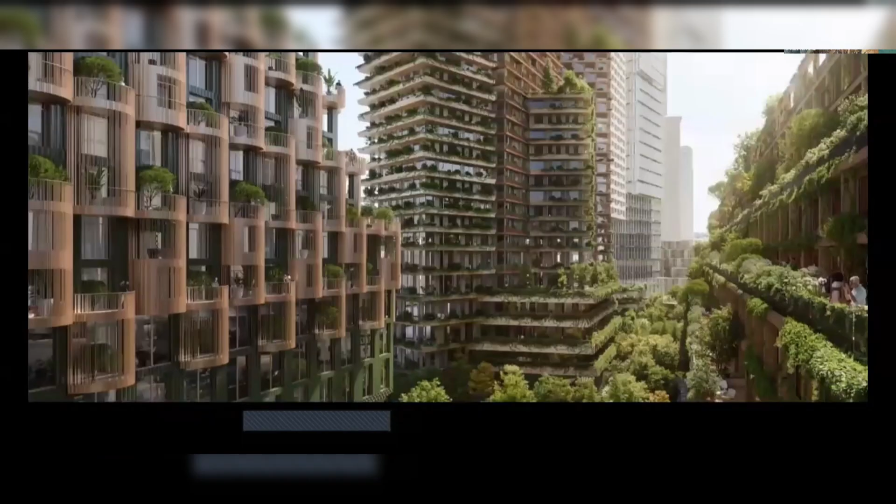We must acknowledge this opportunity and see this opportunity that is being provided to us as urban planners, as designers and architects. We must understand as engineers and planners that we all can shape our local environment. We all have the opportunity to shape our future.

Today, we have 7 speakers who will all tell their stories. We have environmental scientist Maitri Fischer. We have landscaper and regenerative designer Anton. We have Dr. Yeang, who has written over 13 books and been working on green building for almost 50 years.

Thereafter, we will hear from Papa Tiyok, Prasetyoadi, one of the core founders of the Green Building Council Indonesia and director of PDW, famous for building Jakarta's football stadium, and a real Indonesian placemaker, a spokesperson for inclusive design and public spaces.

Joining him will be Dr. Nirarta Samadhi, one of the Indonesian founding members of Cities for Forests and country director of the World Resources Institute Indonesia. Dr. Nirarta Samadhi will be speaking about his new policy design that's enabling Indonesian mayors to build more green parks and public spaces.

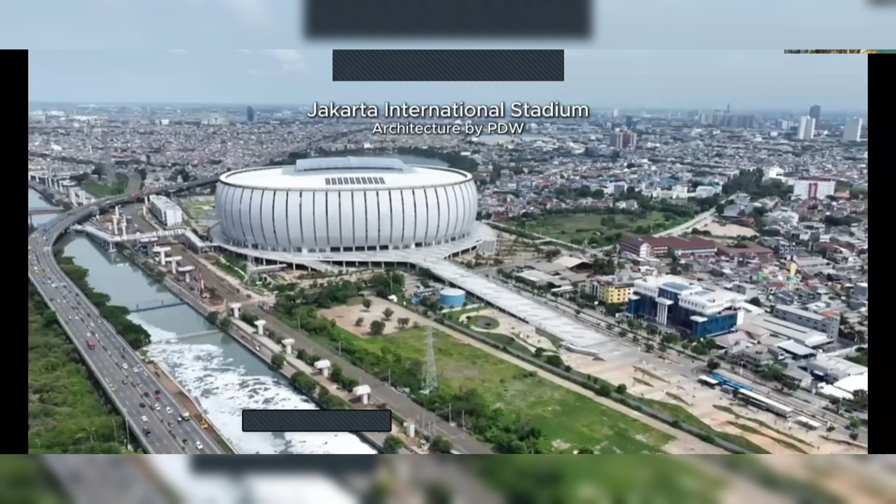And last but not least, we will hear from the Sustainable Building Award winner, the Supreme Award for Structural Engineering Excellence, the visiting professor to Yale and MIT, the unconventional and free-spirited natural building master, who we also like to call Mr. Rock and Roll, Professor Neil Thomas, giving us an outlook into the future and hopefully ending on a positive note. I'll hand over to Maitri Fischer to start this session.

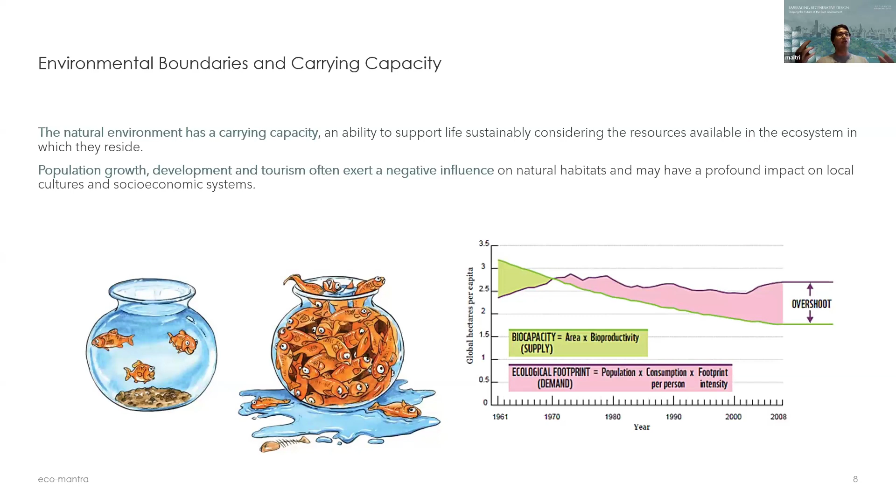So we have the concept of this Earth Overshoot Day, or this concept of biocapacity, where the Earth provides resources and ecosystem services which we need to survive, but ultimately we are consuming more than what the Earth can provide. In 2020, we got to the point where we would have needed 1.6 Earths to maintain our need for resources and consumerism. The fact that we're taking more than can be provided means we're depleting something at a rate quicker than the environment can replenish or neutralize and clean, meaning we're starting to have a net negative impact on the ecosystem, on the planet, on the place that we live.

There are more complex ways of looking at it, such as the 9 planetary boundaries developed by the Stockholm Resilience Center, of which out of the 9 important planetary boundaries, by 2023, 6 of those had been crossed.

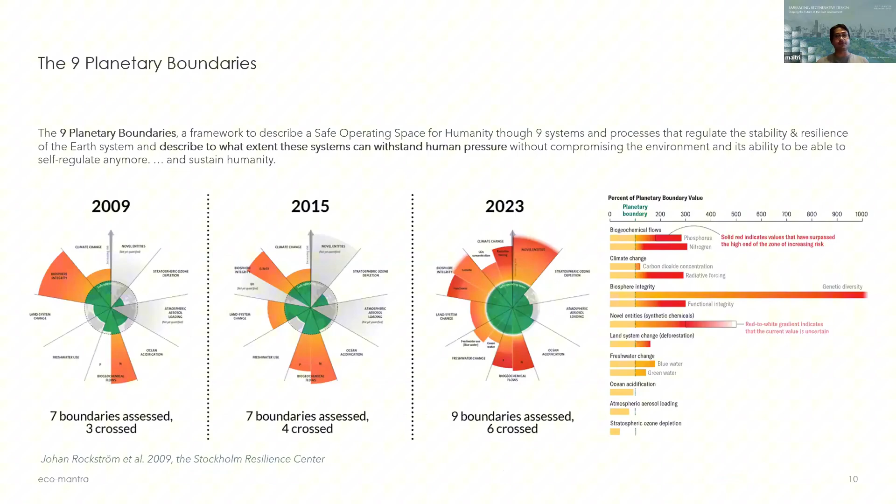Bali, the place I grew up on, is an island. It has clear ecosystem boundaries, smaller than planet Earth. Basically, what's on the island supports the people on the island. Obviously, we have global trade and whatnot, but we're not globally trading in water and ecosystem services, though we can bring in more food, for example.

Ultimately, mass tourism has pushed the island beyond a lot of our environmental carrying capacity. We see many indicators of this. We have massive land system change. We have huge normalizations of rivers, rice field conversion, forest conversions, a lot of built up areas creating impermeable zones. This creates floods. We have floods like never before.

We have a massive loss of biodiversity. We don't have living rice fields anymore. These are sterile places. They're sprayed with pesticides and fungicides and everything that you can imagine to maximize the productivity of the rice, but it leaves us with a very barren land.

We see pollution everywhere. Only 48% of our waste goes to landfill. 52% of our waste in Bali makes it into the environment - burnt, rivers, ravines, oceans, dumped, whatever. We are seeing urban heat island, obviously a global problem. We are facing a water crisis. We have to continuously drill deeper, facing massive pollution of surface and groundwater and a lot of saltwater intrusion.

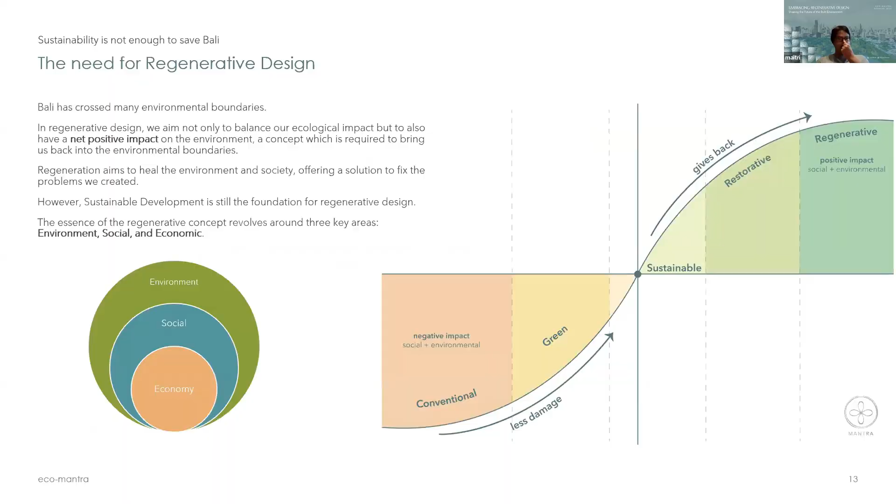So sustainability can only be achieved if we understand the state of the environment. And where you are really determines what you're dealing with. In some places, you have bountiful supply of water. In some places, you have no fresh water. In some places, you have access to waste management infrastructure. In some places, you have none. In some places, it's too hot and humid, and in some places, it's very cold. So ultimately, design has to be done through an understanding of our environmental condition.

So I've drawn up some examples quickly. I only have 10 minutes for this presentation, so I just wanted to do a little bit.

Most of our work is in Southeast Asia, and our tropics are marked by high humidity, intense solar radiation, monsoon rainfall, and dense biodiversity in most places. More importantly, we have unique microclimate fingerprints in all of our sites.

The most important thing in the tropics is how comfortable do we feel? People are always complaining, oh, it's so hot and humid. At our standard average daytime temperature, most people are uncomfortable - it's too hot, too humid, and there isn't enough airflow. So a lot of our work is focused on creating spaces where we can live outdoors without air conditioning. How do we create spaces that are comfortable without air conditioning?

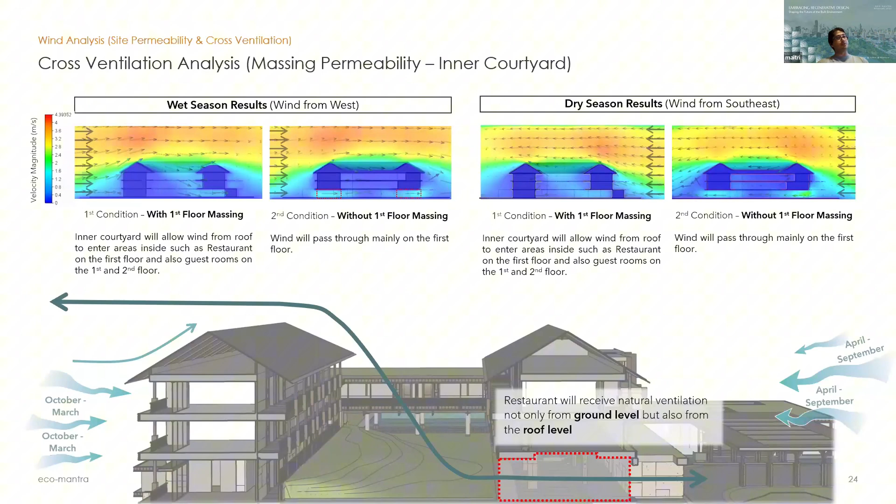So it's really important to create a building that allows wind from all over to penetrate the courtyard and distribute itself to all its occupants. Here we have an example where we optimized airflow and cross ventilation with computational fluid dynamics models to improve the amount of air that would go into the inner courtyard of the building, along with our easterlies and westerlies. The building is appropriately penetrated from east to west.

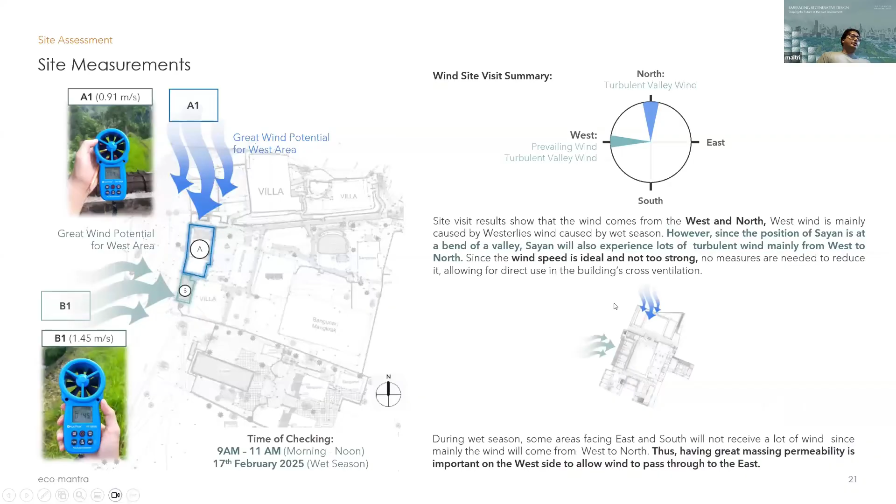This is actually the example from the design of my house. It's really... I'm running out of time, huh?

Yeah, I think the understanding of the prevailing winds and also the microclimate that each site has is enormous. It has so much potential if we properly take the time to understand our sites, walk our sites, study our sites, and potentially put up some measurements and devices to measure and document the prevailing environment on our site. I feel like this is something that a lot of developers and planners are missing out on, and architects are maybe also not properly trained in understanding the environment in the way other people can. We always think that these kinds of design and developments should be more integrative, with many more people involved, especially in the very beginning phases of the planning.

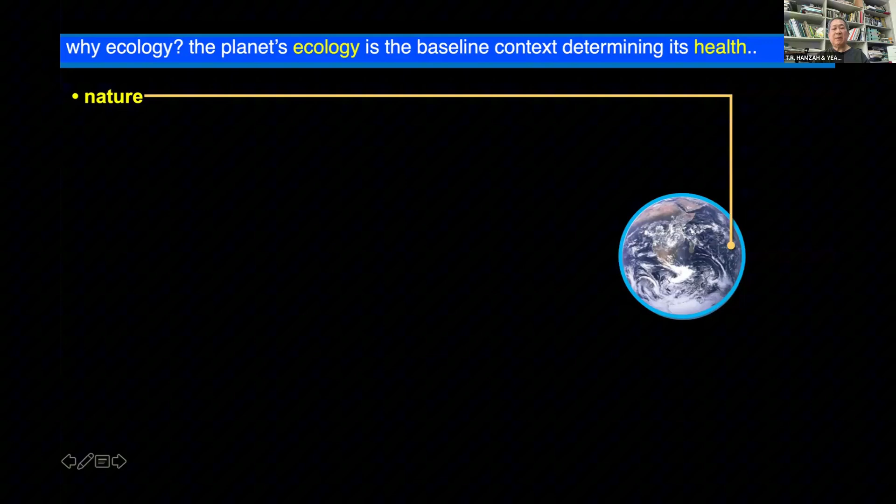Most architects are not eco-literate, so I'm going to go through this very quickly to explain the basis for our work. We see the planet as covered by this thin film called the biosphere. Within the biosphere, there are units in nature referred to as ecosystems. Ecosystems exist in the biome within the biosphere, and within ecosystems are communities of plants and animals that live in habitats, and their populations of different species and organisms.

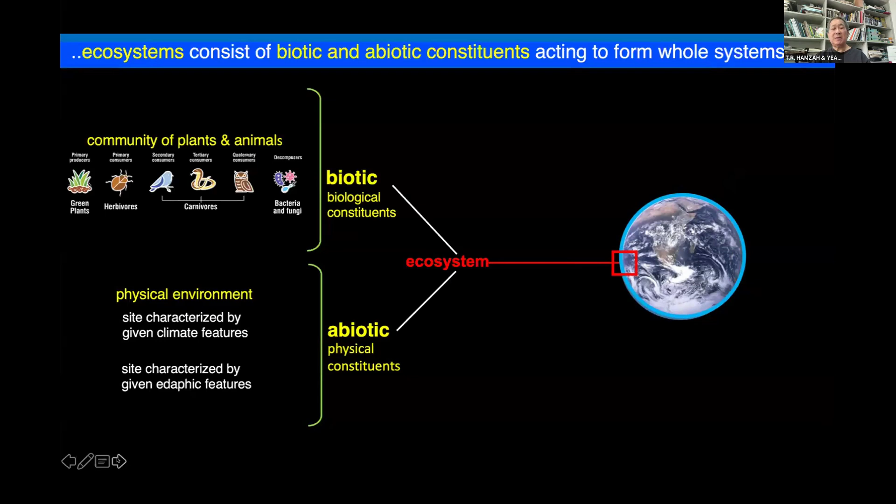The ecosystem consists of both biotic and abiotic constituents acting together to form a whole. Biotic are the biological constituents, abiotic are the physical constituents. It looks simplistic, but actually within ecosystems there are very complex processes that take place between the plant and animal communities, the geology, the soils, and so forth.

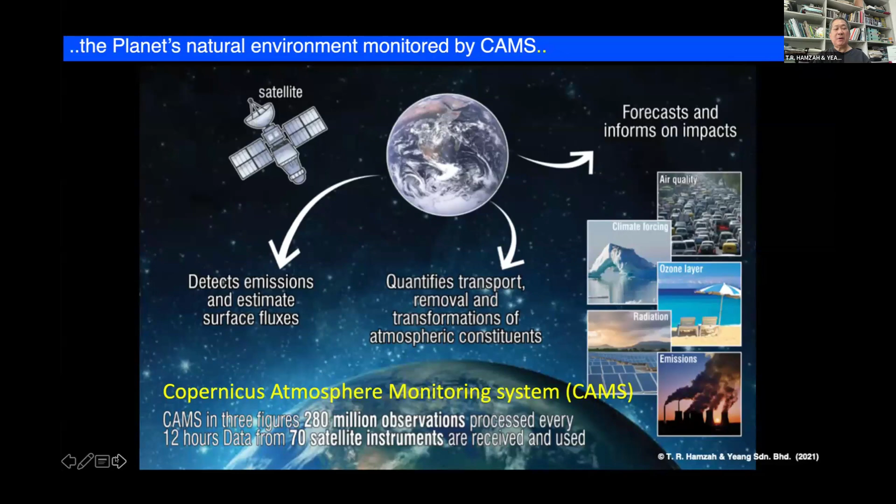But this is just another quick summary. What we need is a universal monitoring system so that we know exactly what society is doing to the ecosystem, so we can take appropriate rectifying action. Now, within the planet, there's human society.

Human society is part of nature, but it's the most powerful of all species. So I see this as a separate item in our approach, that we are so powerful. We can change the landscape, we can deforest it, we can change the waterways, we can pollute the air.

Then we make things. We make more things than any other species in nature. We make built systems, we make artifacts, we make toys, we make telephones, and it's estimated that 60% of the environmental crisis is caused by buildings. So we are the authors of this suffering, and we should be the authors of its recovery, and not the victims.

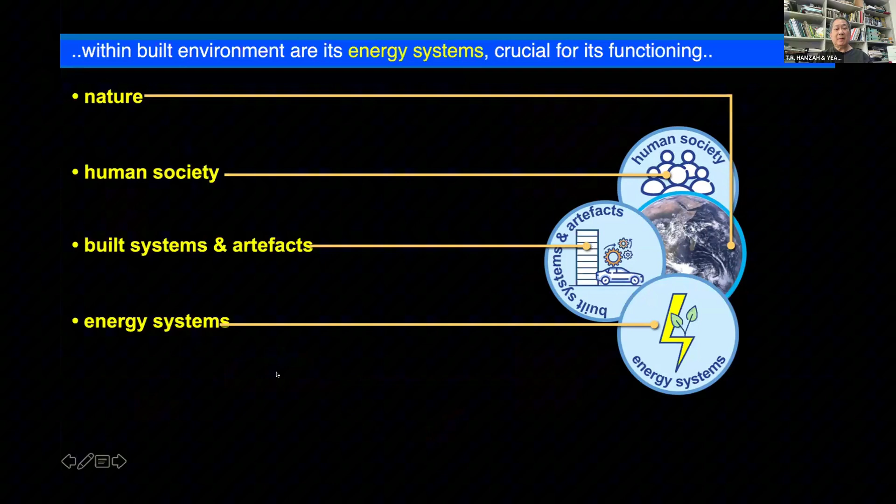Then there's the hydrological systems, and water is what life is all about. When astronomers look into the sky, the first thing to look at on different planets is whether there's evidence of water. If there's evidence of water, that's evidence that there's potential for organic life.

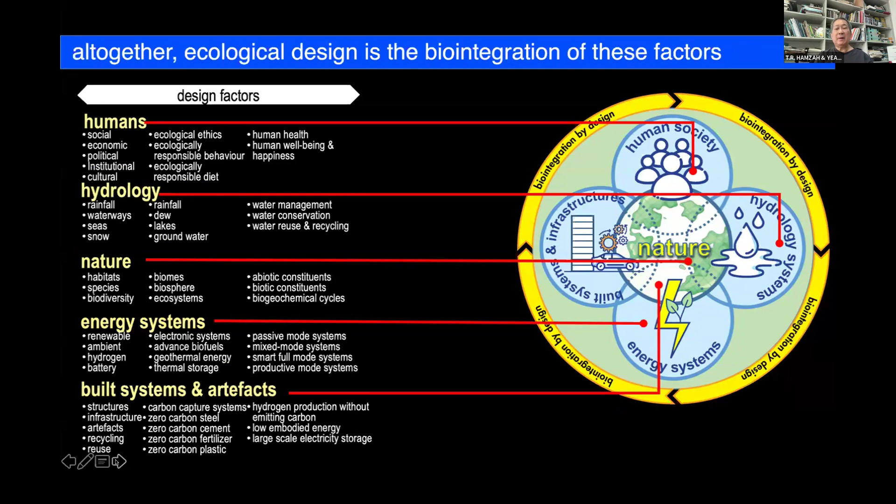In summary, this is the model of our design, to see how we can biointegrate these five factors together: nature, human society, built systems, infrastructure, energy systems, and hydrology, into an organic whole. That is the challenge of ecological design, and that is, if you like, what I'm trying to do for a good part of my life.

So we look at the first thing, which is nature-based solutions by biomimicry. Now, the approach of biomimicry is to select a biological system. In my case, it is the ecosystem. And the next step is to try and identify its attributes, to try and create design systems as human-made ecosystems.

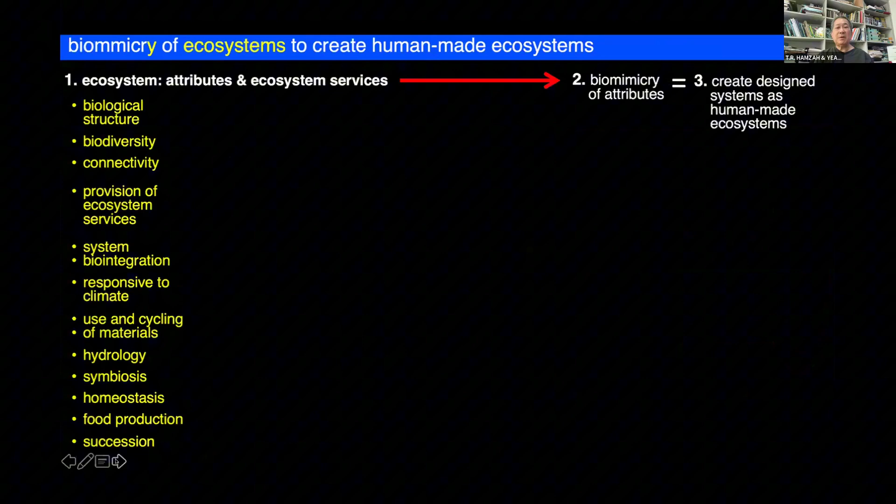So these are some of the attributes of the ecosystem: it has a biological structure, it has biodiversity of both biotic and abiotic constituents. It's interconnected, and it provides ecosystem services, which are services that contribute to the well-being of the planet without human intervention. The systems are biointegrated, and materials within the ecosystem cycle.

I don't want to go through this whole list, it's just a list of properties that we need to emulate and replicate. So that's part of my work, which is to try and replicate, reproduce, imitate it, and augment it. We can cooperate with nature and intensify it. So these are different strategies that are used for ecological design.

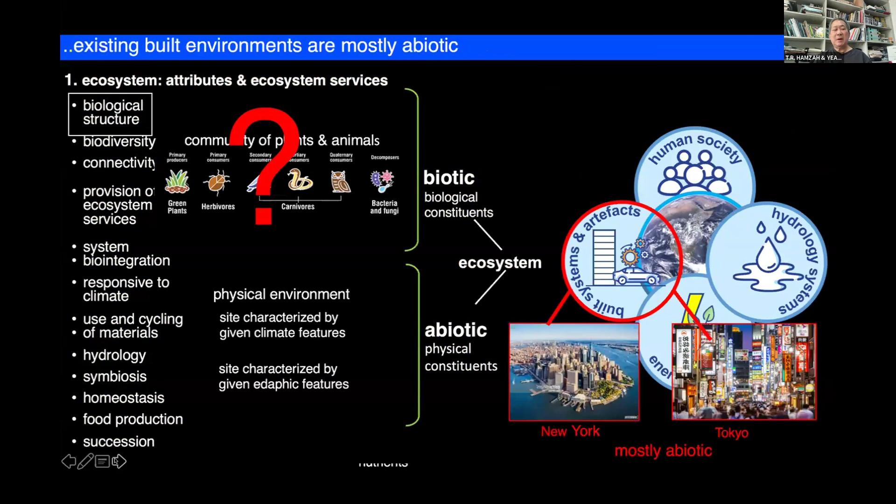So now back to the biological structure. The ecosystem consists of both biotic and abiotic elements. But let's look at our existing built environment—it is mostly abiotic, mostly inorganic. So if we were to imitate the biological structure of ecosystems, we have to compensate for its lack of biotic constituents, and bring it together and balance it to make an organic whole.

Or the idea would be interconnected vegetation.

Being interconnected enables a greater sharing of internal resources and engenders a much more stable and biodiverse ecosystem. And so, of course, the ultimate is to cover the entire built environment with green, with vegetation, biotic constituents. That is the golden chalice of what I'm trying to do in our work.

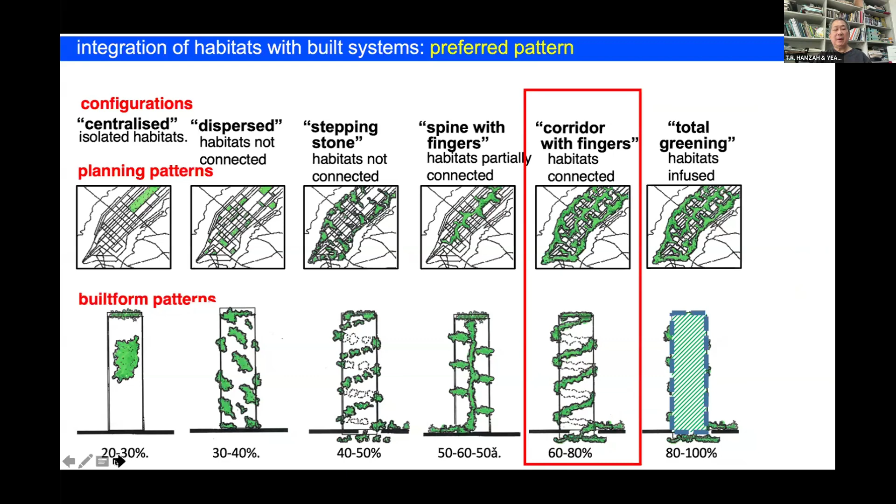Now, these two are the preferred patterns, and we try to achieve 60 to 100% biotic constituents, so that within the built form we can have green roofs, vertical greening, green sky courts, green atriums, green areas on the ground, and green links to the hinterland and the underground. With this as a start, we try to link all our buildings, not just horizontally, our built environment, the greening, but also vertically as well.

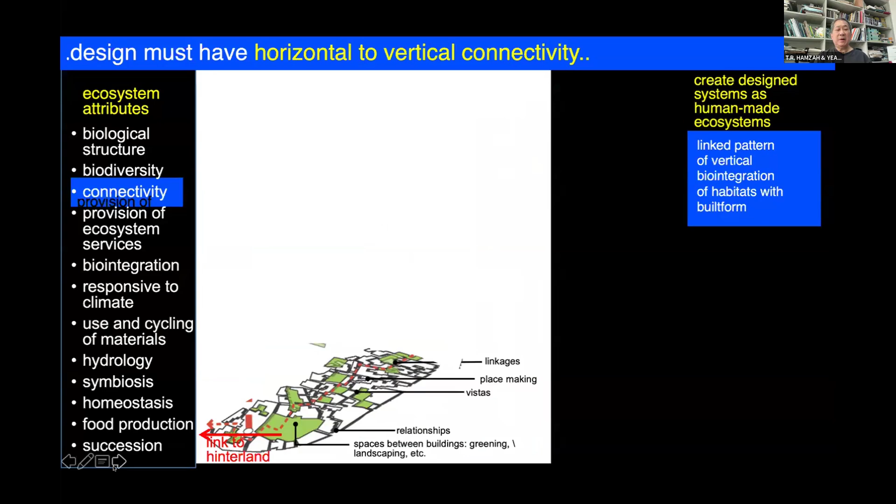This is an indication of what we try to do in our design when we create habitats. This is a competition scheme that we did in Singapore. We didn't win it, we got second prize, but the idea was to explore the possibility of a spiraling relationship.

The population density is quite high, far higher than what we have in Bali. And that's a good view. We should be most concerned about larger cities than smaller cities, because that's the generic problem we have to address.

I can't change the slide. It's okay, I think we are coming. I'm going to have to start to cut you short, Dr. Ken, because we're already at Anton's slot, and I couldn't get the presentation, the first bit, working. So would you mind if I have a bit more? Wait a minute, okay. I'm stuck, I'm stuck now.

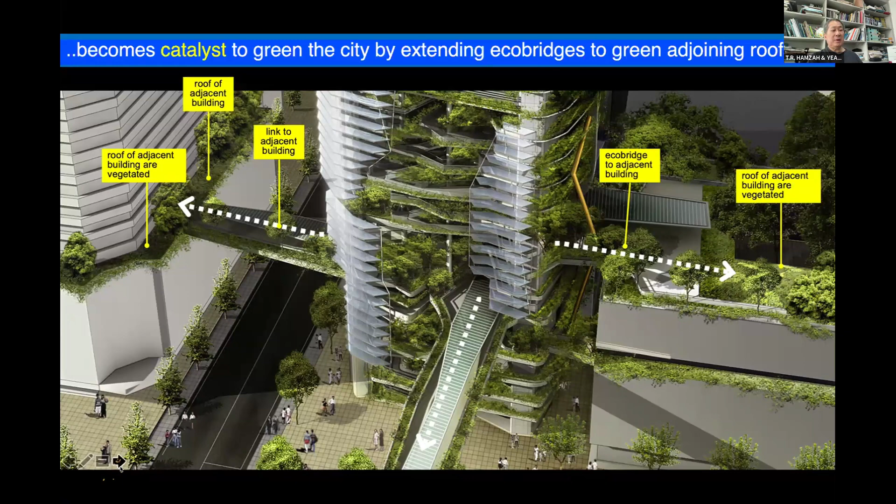The proposition of this project is that when the landscape ramp reaches the floor level of the adjoining roof, we bridge across and we green the roof. So this is a way of greening the city.

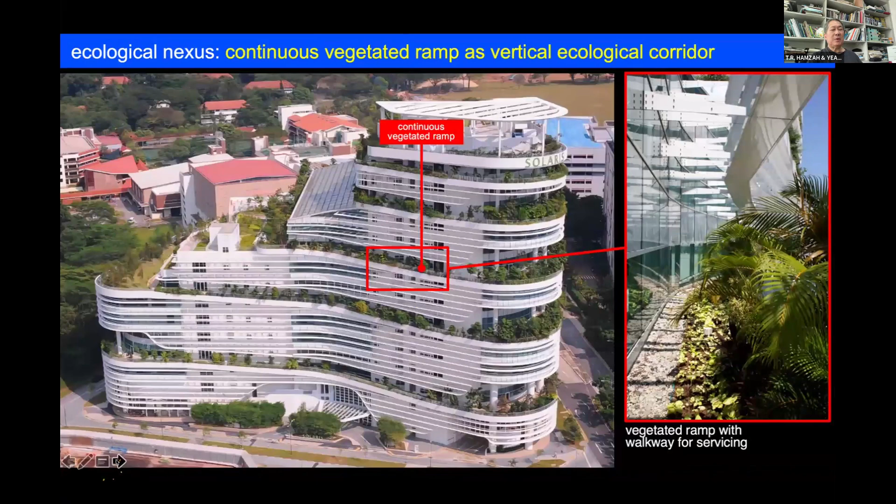Here's an example of a building where we had continuous vegetation going from one end of the site to the other side. In the Solaris building, we had a vegetated ramp, but this time for the ramp we also had a walkway, so you can service the vegetation. And we had sky courts, which are green.

Hang on a minute, okay, I'll end now.

I think the context is wonderful, and what's also very obvious is that you've authored many books and have a set of principles and also a methodology in place that you've developed, which a lot of students use, and which is, I guess, also part of a student's learning.

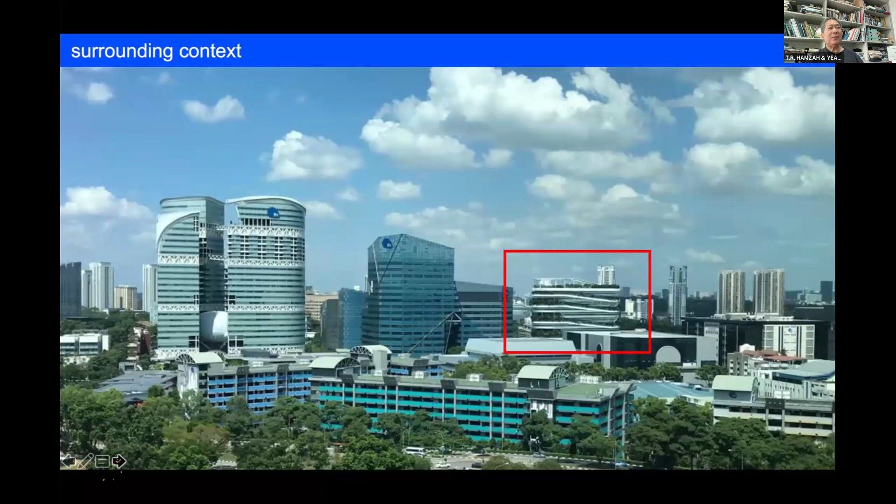Perhaps we can have a brief discussion with Anton if he's ready. Anton, do you want to jump in here on this note? Yeah, hi, hey, I didn't get it working just now, you know.

Okay, good afternoon everyone, and hi Dr. Ken. I think we met in Jakarta previously for a talk in Jakarta Architecture Festival, and projects from Dr. Ken have always been my inspiration in pursuing this architecture and landscape architecture career, because he's a pioneer of bioclimatic and ecologically integrated architectural design.

So my topic today is going to show examples of regenerative design from a landscape architecture perspective, and I will showcase some examples of projects in Singapore and Indonesia where we integrate ecological design and regenerative elements into these projects. As we know, most participants probably come from the Southeast Asian region, and this region shares the same problems.

We are facing deforestation. A lot of land is being demolished for new developments, and this is always happening in big cities. As a result of this deforestation, we lose a lot of biodiversity, a lot of extinction. And when we talk about extinction, it's not just fauna, it's really about the vegetation, different kinds of species, from insects even, it's very important for nature.

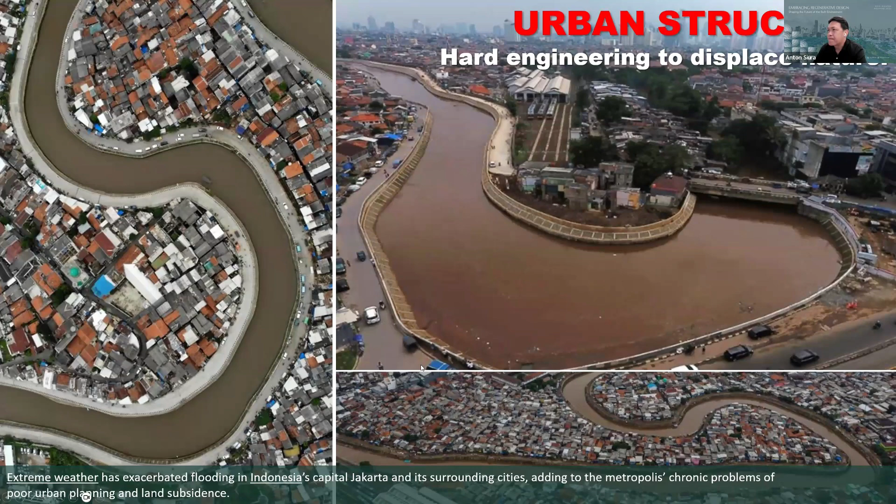And this keeps happening. When this keeps happening, we don't have space to absorb water, we don't have space for the trees, and the water is everywhere during the high rainfall periods. Flooding becomes a major issue in the big cities, right?

And I believe we all contribute to this because most people are moving to the city to make a living, and the city becomes an undesirable place to live because it's getting hot or it's getting too wet. This is also happening in Singapore, when we recorded 37 degrees in Ang Mo Kio. This is the highest temperature, and I think recently this record keeps getting broken.

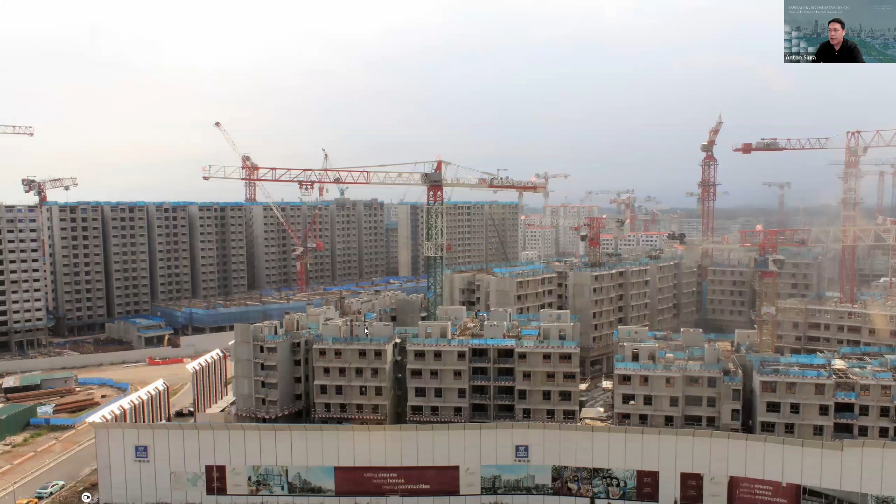So we are heading into unsustainable futures if we keep doing the same thing. This is a reflection for us in our role as architects, landscape architects, engineers, or planners, or if you're the stakeholders. We always face the same thing, the constant demolition and reconstruction for urban growth. So what role can we contribute, and how can we balance it? I will show two example projects, from Singapore and also in Indonesia.

Singapore has been shifting from a city in a garden into a city in nature in the last decades. The idea is really about how we can integrate design that promotes a lot of greenery, not just on the surface but on the rooftop, and also provide a lot of space for water infiltration, detention, and storage.

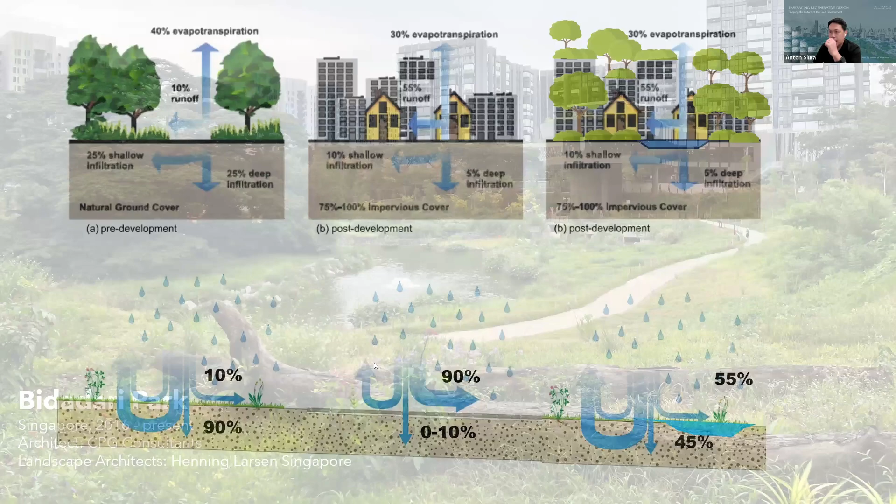This is a project I was involved in back in 2016, Bidadari Park, a massive new planning for a former cemetery area. It's about a 60-hectare site, and what's interesting is that this area is designated into new public housing. But in the master plan, there's a 10-hectare park of the existing secondary forest to be preserved, located in the center of the new development, with most of the perimeter of the site built as public housing or residential area.

I'm showing the development from 2010 to 2024. As you can see in the left area, this is a former cemetery zone, and now almost everything is fully developed into public housing.

But in this project, I want to showcase an example of a park that focuses on regenerative design. We have a central park with a retention pond. The function is, other than providing park space for the new residents, to also become the place for detention and retention, because there's a new catchment that needs to be captured into this pond.

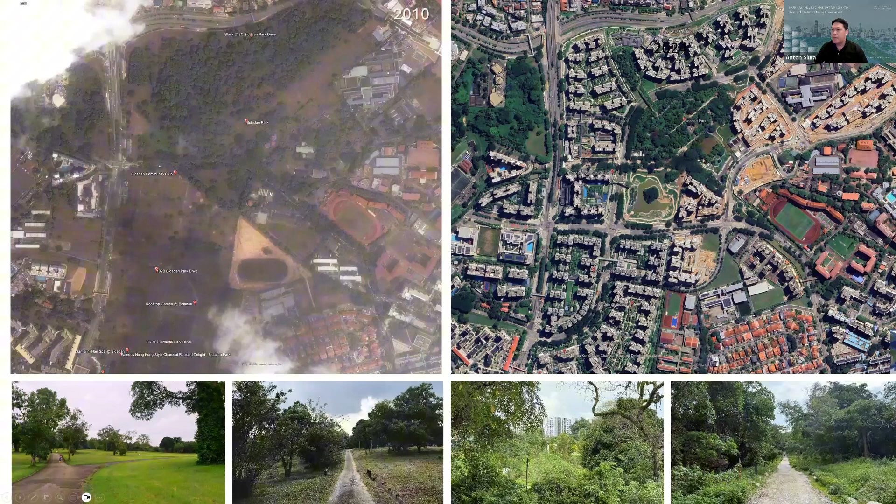Not just creating a natural pond - even the existing trees are kept within the pond as part of biodiversity attraction efforts. You can see the different quality of water when it's on concrete versus on a green area. This water is not just clean, stored, and slowing down the runoff, but it also provides life for biodiversity, and becomes a space for people to do many recreational activities.

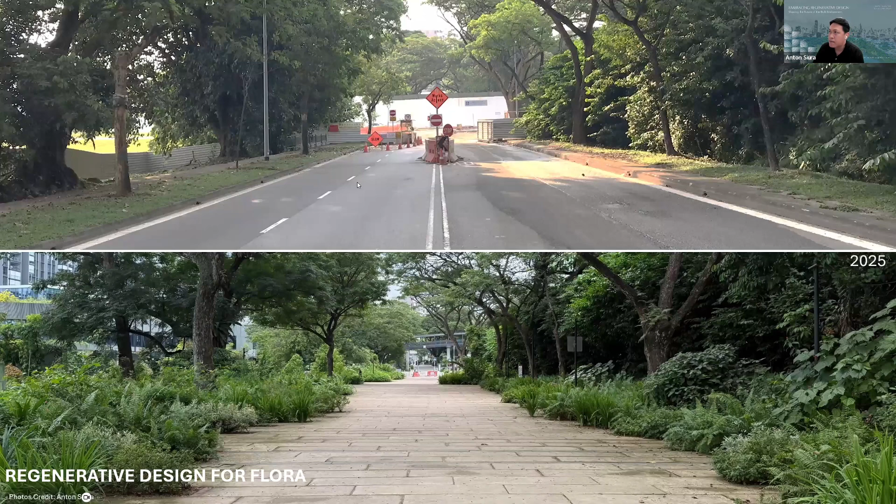The existing roads are also kept, with low intervention. They changed into a pedestrian path and introduced different kinds of flora and native plantings of Southeast Asian regions. This is the left side, the existing park. As you can see, sometimes we don't need to do massive efforts to create a nice park.

We just need to do a low intervention, introducing a lot of native plants and changing the drain into a natural drain. The result is a space not just shared by people, but also becomes a place for the birds to come. And since the birds come here, we provide water for the birds, designing a marshland that allows the birds to come have a shower and also become part of the ecosystem for the park.

Not just providing space for the birds, we also designed an eco bridge that links two different parks. This bridge is 15 meters in length, but only 2 meters is designated for pedestrians, and the rest is planted with dense vegetation, to allow smooth migration between the two existing parks.

And the design also respects the old gardens. So in the 50s, there were mounds, and we recreated those mounds, and this mound became part of the identity of the park. And when my mothers and my son come to the park, we try to create these new memories, developing from the past memory.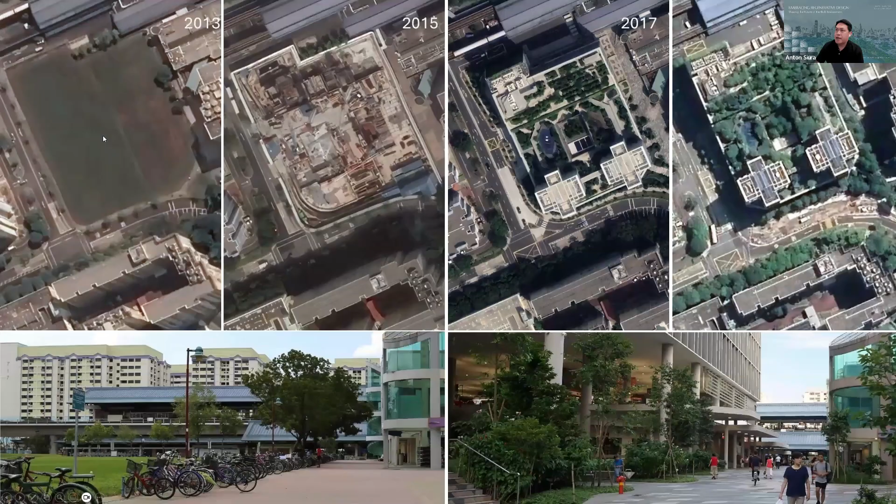So it changed from a very small plot of 9,000 square meters, from a passive lawn into a very biodiverse environment. Almost 600 trees are planted in this size, meaning 1 tree every 15 square meters. And not just planted trees—we designed a system that cleans the water, slows down the runoff, and stores it.

We reuse it for maintenance and irrigation of all the landscape. So during the rain, you can see the water trickling down, cleaned by different vegetative filter systems, and we reuse it to irrigate all these plants.

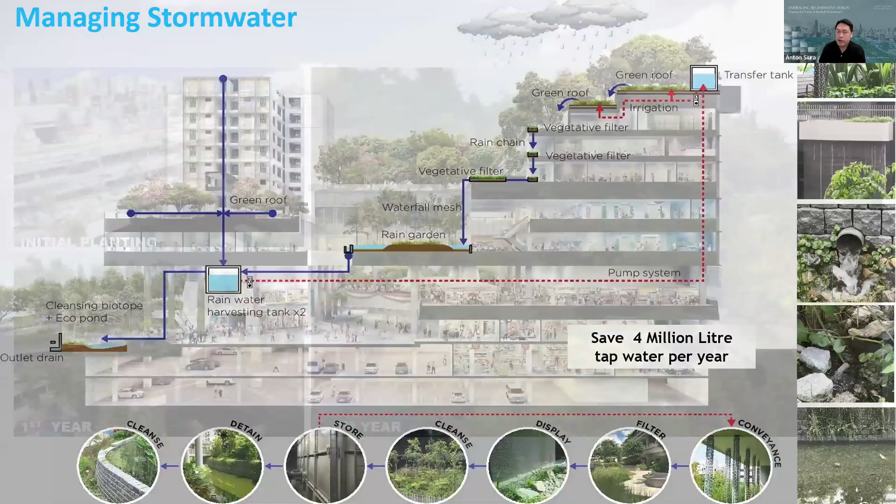Within 3 years, almost all the trees covered the surface of the building, and you can see the transformation. All these plants, all these trees, are built on concrete slabs. So we just need good soil to allow nature to thrive.

And the plants planted here are biodiversity-attracting plants, fruit trees. They create a space for many animals as well. You can see the transformation in just 10 years, how these trees grew from 4 meters to 15-meter heights and became an amazing space for people and animals using a regenerative design approach.

So now we move to Indonesia. That effort is not just finished in Singapore. I'm trying with my team to do a lot of regenerative efforts in Indonesia. For the last 6 years, we have worked on over 50 projects, and every project we always approach with the same method: regenerative, water-adaptive design. This can be applied to many different scales, from public parks, streetscapes, buildings, residential, to resorts.

An example is the Tebet Eco Park in Jakarta, which is an old park that has been there for the last 50 years, but it had a lot of problems: a garbage dumping site, inadequate hydraulic capacities, and it was split by the roads, but it had a lot of beautiful trees.

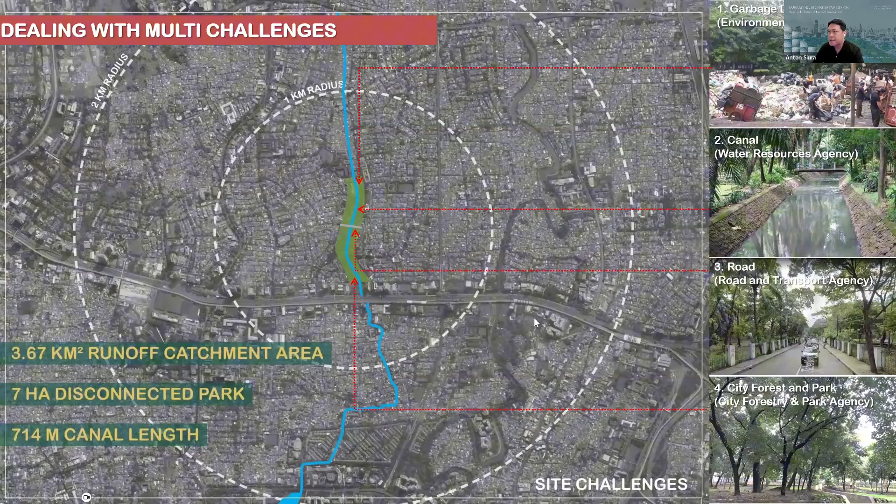And when I look at the transformation again, in 4 years, most of the existing trees are still intact. We just did a very low-impact intervention to design the park to be more resilient. So we transformed this existing problem with nature-based solutions, changing the dry land and the flooded land into a more blue-green open space.

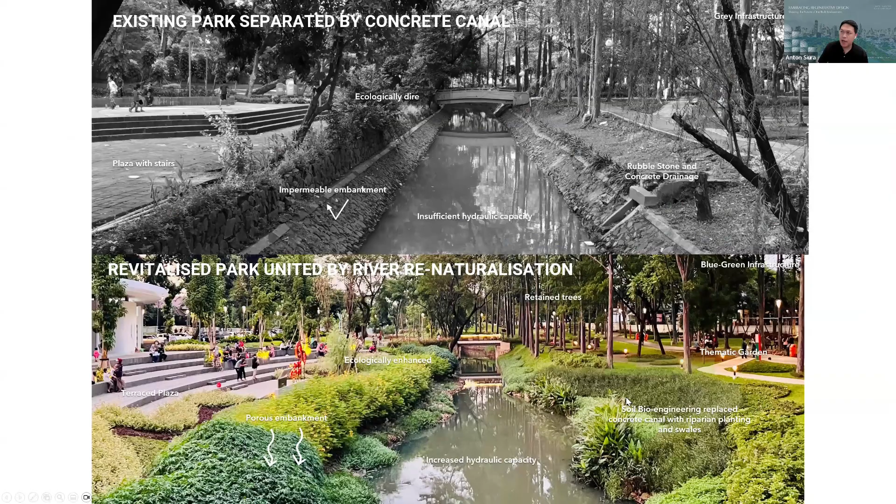So we allowed a lot of space to capture the water, and it will allow people to enjoy the park as well. So the transformation is really about changing the mindset—that gray infrastructure can be changed with blue-green infrastructure. We integrated a lot of plants along the riparian zone, and we broke down the existing concrete canal and reused it as part of the material for the bioengineering—gabion walls, riprap, or the hardcore of the paving.

The result is really changing the mindset. The drain, which used to separate the two spaces, now unites the space. A lot of people want to be closer to the water, and the water has more capacity to discharge into ground infiltration and also slow down its speed.

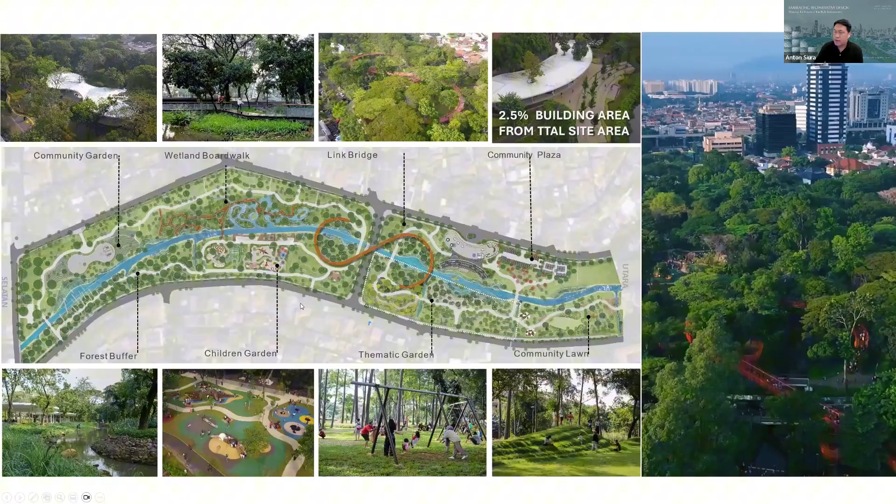What's interesting is after the completion of parks, a lot of private sectors take similar initiative. When we first showed the developer Sinarmas the potential of this project, they had just built this canal about 3 kilometers, and they said, 'Can this be like the Tebet Eco Park?' We just smiled, because for us this is an opportunity.

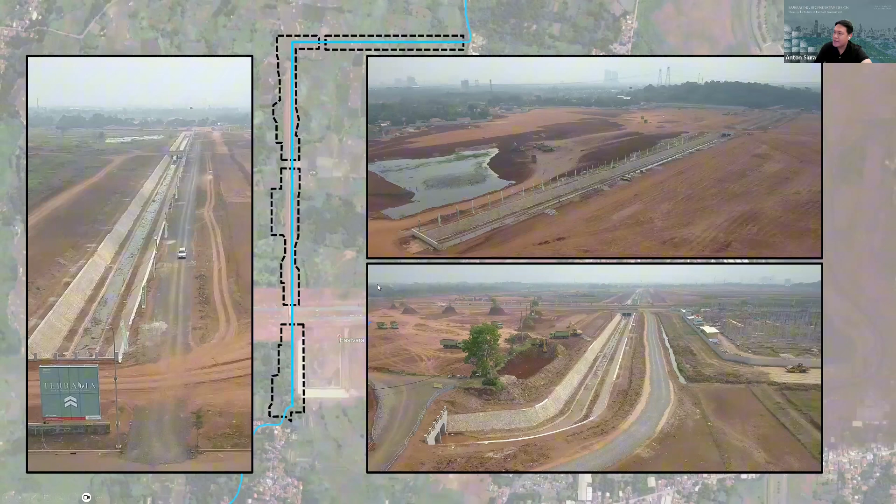This is a half-completed canal in Tangerang BSD area, being constructed with cement and concrete. Our approach is to break down that concrete, renaturalize it partially, and integrate ecological design to improve connectivity, so it becomes a park that's more resilient for the future. It will also become the core of the new planning area, a continuous park that allows water absorption, flood mitigation, and provides a lot of recreation.

But Anton, we're already getting close to the 15-minute mark. Yeah. We're going to have to move on to the next topic soon, if you want to come to an end.

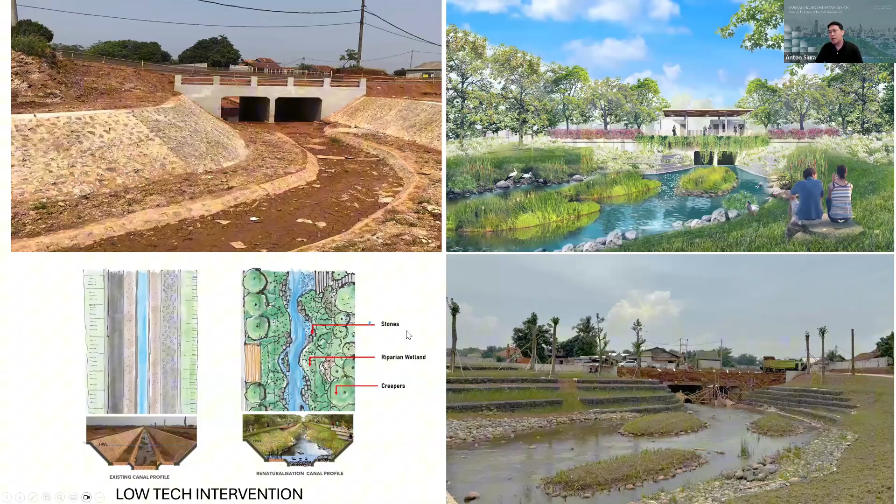So this is an example of how we approach this with low-tech intervention, changing the rubble wall into a natural wall, and this is the result. I think it's still ongoing, the construction almost completed, but the fun part is we return nature into this area using natural stone and vegetation. As you can see the difference, a place that was avoided now brings people closer to the water — they're sitting around the rivers, putting their feet in the water, and a lot of fish are also coming.

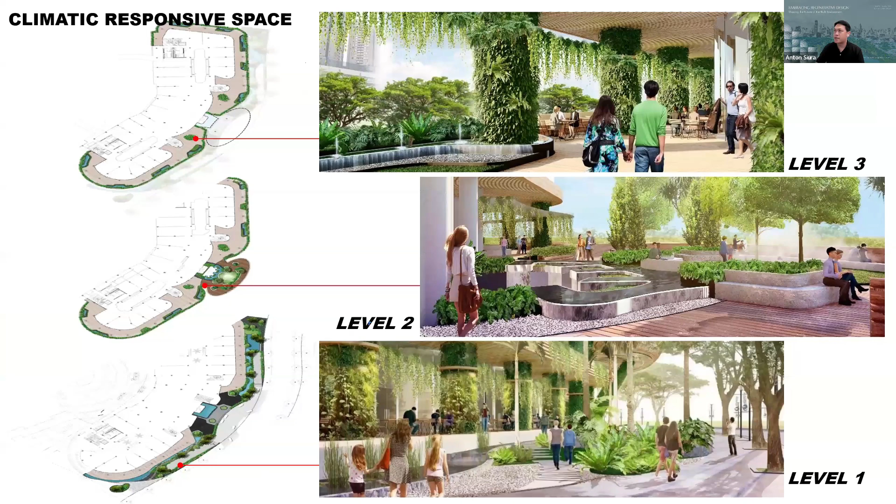And yet another example with a building also — this is in Epiwalk. The building that was normally cladded with a wall is now open and changed into a carbon-absorbing surface, so we create a different kind of experience. A building that used to be closed is now open and cladded with a lot of vertical greenery that helps cool the air. You can see the difference.

A building that needs to provide a lot of aircon, when we open it up, creates more value — people want to sit outdoor surrounded by greenery. You can see the difference to the urban setting as well; you prefer this kind of setting that's more welcoming, with a lot of plants and birds and butterflies coming to the surface of the buildings. This shows that regenerative effort doesn't just end in open public space, but can also apply to existing buildings.

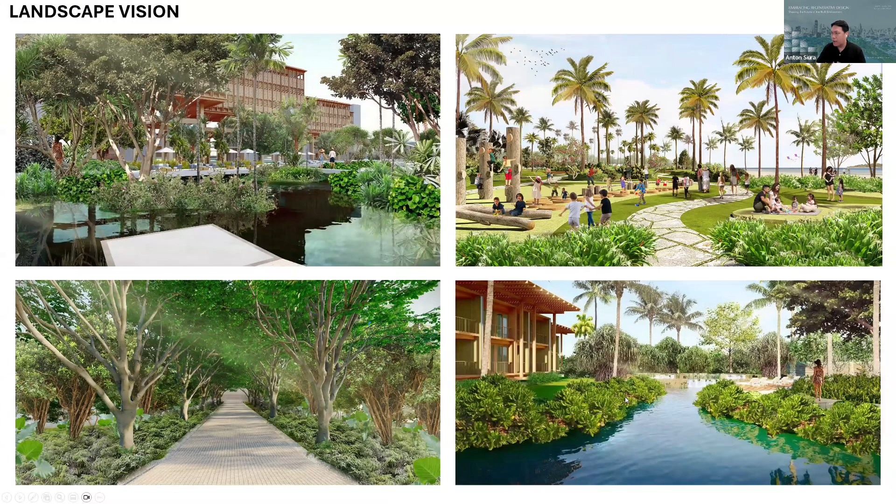I'll come to the last project in Bintan, how we can integrate regenerative design into a luxury project like a 5-star resort in a coastal setting. This is our vision for the landscape, to have a lot of native planting and a lot of water as part of the collection storage. The existing condition had a lot of bauxite soil, and we used a lot of native plants taken from around the project. Within one year, we transformed this construction site into a very green and resilient blue-green space.

So Bintan lagoon had a lot of deforestation — there was a lot of logging on Bintan Island. So this effort was to put more native plants of Bintan into the project, and also reuse water for the planting ecosystem.

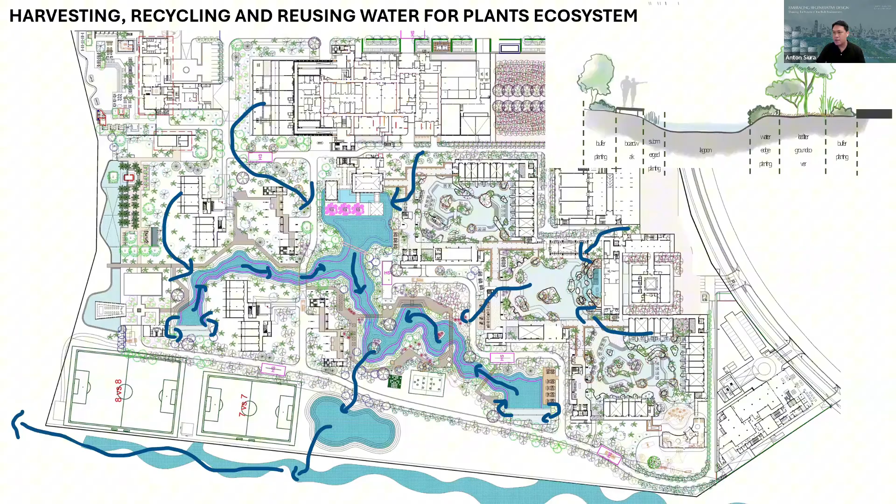These are our visions to create lagoons that become part of the central collection, and this is the transformation. You can see this water isn't just part of the landscape features, but has a function to hold the water before we discharge it to the sea — we clean the water with the plants. These plants also attract a lot of biodiversity; we can see animals like monitor lizards, birds, and fish all coming naturally to this resort.

So it becomes a very unique resort — during the rain, all this water is collected in the lagoon, which has the capacity to retain and detain it. We reuse this water as part of maintenance; whatever rainwater comes into the resort is collected and reused, reducing a lot of water use. Our continuous effort is really about promoting regenerative design, and there are many opportunities across all our projects for regenerative design.

Thanks, Tino. One of the main things we see is groundwater extraction — developers have deep wells and are taking lots of water out of the ground. What you're showing here is groundwater recharge as well as rainwater harvesting, making use of the water and using less groundwater, correct? It's really nice.

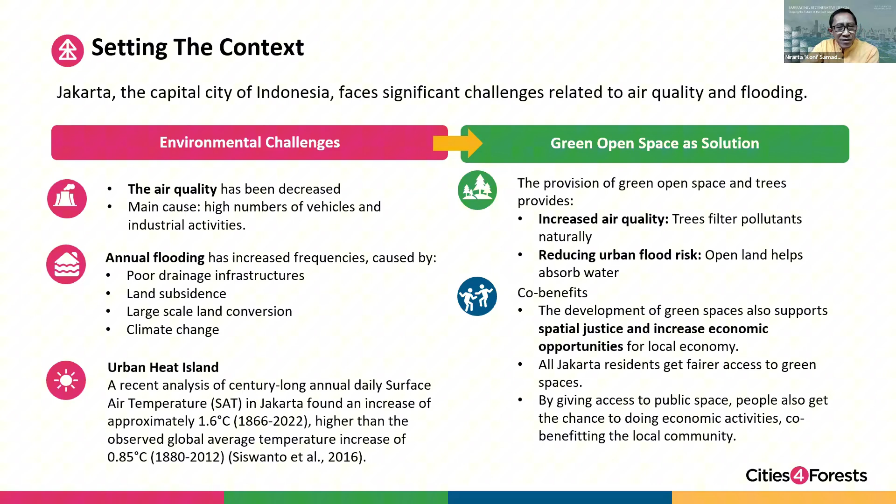We do research, we do tree inventory, tree mapping and whatnot, and even came up with a tree inventory methodology that is now being used by city park agencies at the city level, nationally.

Now let me take you through the process of turning research into regulation, which is then used to guide the development of cities - in this case, Jakarta. So the first thing we do is analyze the distribution of green open space, because we want to see the balance between open space and the built-up area. At the same time, we need to do a literature review on best practices of green open space regulations elsewhere.

So again, as I said, we developed a tree inventory methodology. And also we were able to do some sort of modeling, nature-based solution modeling, in concern with urban flood and also urban heat island, just to show that green open space and trees are actually a solution for some of the cities' problems.

Then we move to the regulation formulation. So based on the research, we come up with what we call an academic paper. This is something that is mandated in the regulatory process in Indonesia. So the academic paper is being used as the reference to draft the governor's regulation at the time.

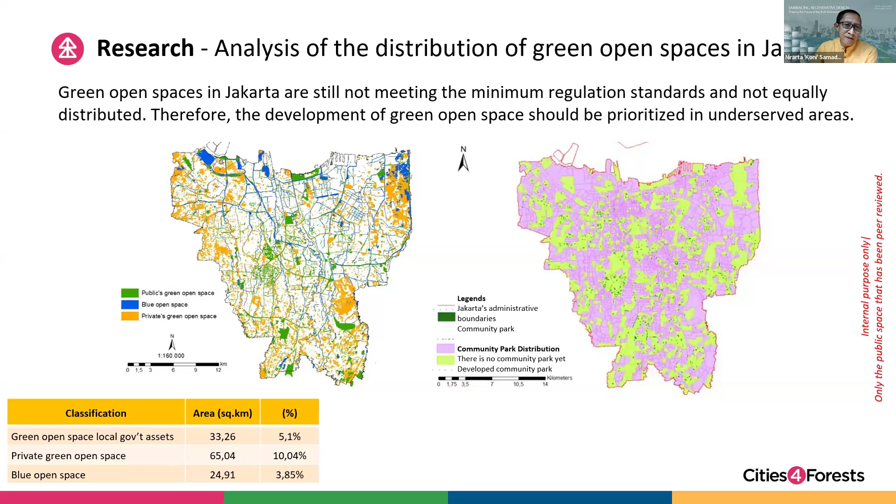While we are doing the regulation formulation, some limited public consultation was also done. But the goal is actually more on the education side of things, raising public awareness of the importance of green open space. We need to get people—of course by instinct it's a good thing to do—but if the public knows better what the role of open space and trees is, then it's going to be easier for the government to do that.

This is the two regulations that I mentioned: one is on tree management and protection, and the second is on park provision and its utilization.

So I think the eco parks also were built during this period. Just to show you, the lighter green is where the new parks are being built, and we try to prioritize places where they don't have parks yet, so that the distribution is a bit better.

So what we learned, at least we learned three things, and I think this is not unique to this case—every effort to turn research into science-based policy is almost similar elsewhere. First, of course, we need to be able to align our support with the government's priorities and needs at that time.

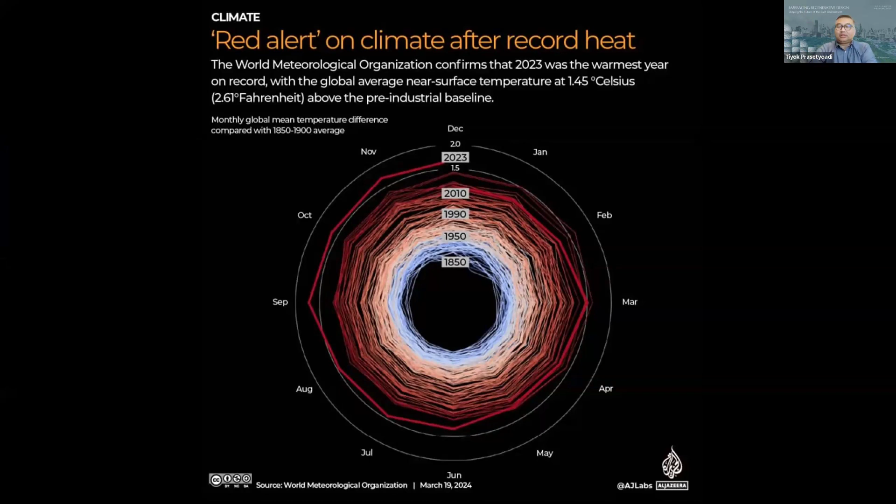I'll follow up with what Pak Koni has already delivered, that now we are closer to the temperature increase because of climate change. It's now moved from 2030 forward to 2027. We have to do a lot of regeneration and adaptation, because we can not rely only on sustainability anymore, but we need to put up our effort in combating climate change through the built environment, what we do for a living, what we have in our profession, and try to influence the larger field. This is the challenge.

Working with Green Building Council Indonesia, the message is clear that we put people and nature first for resilience to climate change. So part of adaptation, we're not just surviving, we have to thrive. That's a very strong spirit that we have to carry over for everybody.

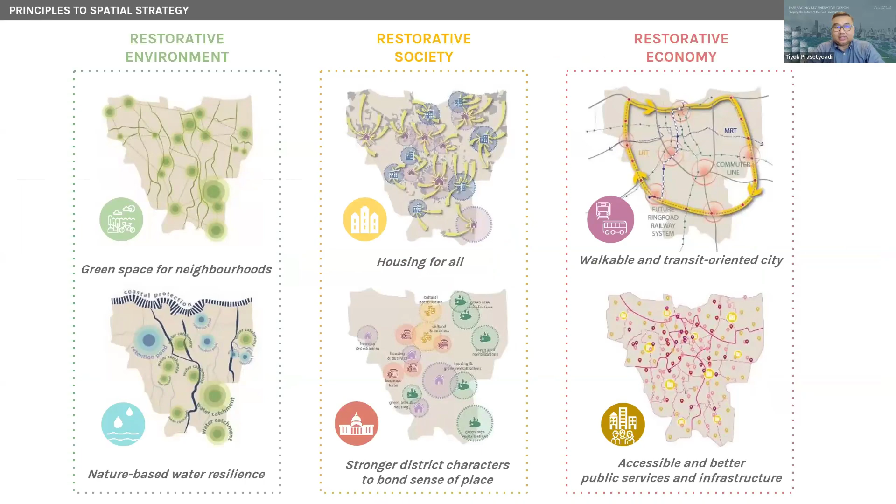At the edge of Chinatown, there's a great mosque, the old great mosque, and the heritage market by Thomas Karsten. Not exactly from climate change, but it burned down, and it's already almost 100 years old. Over the years since its beginning, the alun-alun, the open space, has been occupied by pressure from the economy.

So the fire actually gave us an opportunity to reshape the urban fabric. We put the market underneath, restored the old market building, and gave back the alun-alun. It's part of the regeneration of the city, giving back green space. Underneath the green space there's parking and more shops, and the rest of the shops are accommodated in a new building, restoring pedestrian connectivity to the mosque, Masjid Agung, to Chinatown, and to the surrounding commercial area.

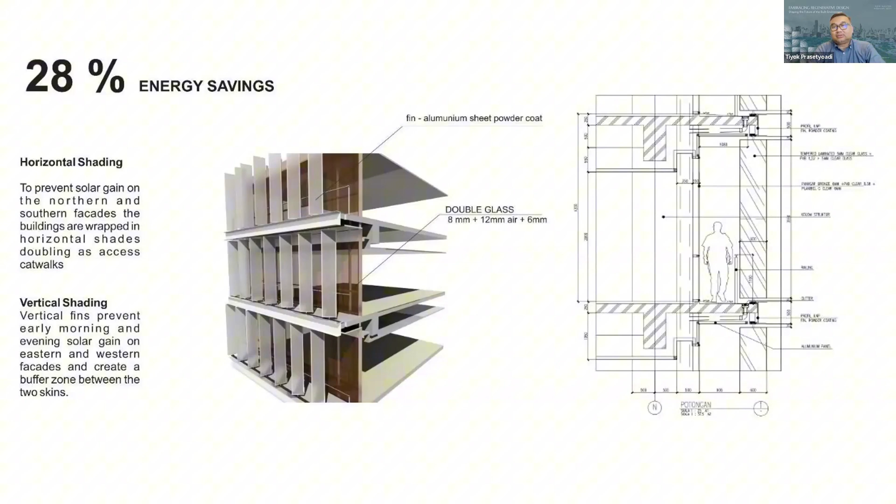This is part of the facade that you can see. The building itself looks dynamic, with different angles, different views, different shades, although we have a monochrome color. And also the space underneath, we are putting back nature into this hard commercial area.

We apply crime prevention through environmental design, so people can look and be seen, see and be seen, creating a secure environment. We're not building a high fence, two meters tall, but we are using landscaping as our fence, a horizontal fence.

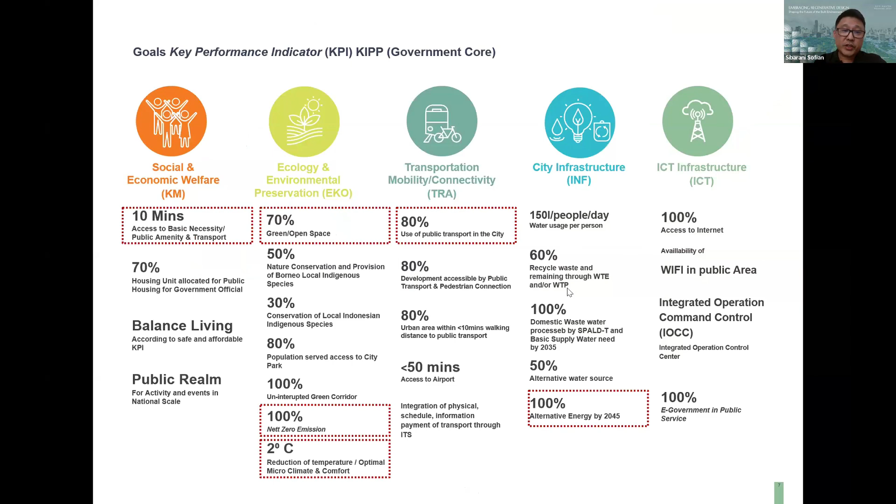The first one we're going to build, and the one we'll show, is Town Number 1, the government center, which is about 6,600 hectares, the size of Bumi Serpong Damai. Just to give you an idea of the performative situation required — it's quite ambitious, and I don't think there's a city that is already hitting this target. As part of being a model city, we want to create the most ideal situation where we hit most of these sustainable targets.

I divide my presentation into two parts: first, how to interpret the vision, goals, and KPIs in technical terms, and what that model of the city looks like. Second, I'll talk more about the sustainable urban form, in the context of trying to be a forest city, to the extent of biophilia or biomimicry.

So to begin with, we are not starting with the virgin forest. It is already a disturbed forest, already changed a lot by the previous government back in 1998. It was already given as a concession for a paper pulp plantation.

So we are dealing with already a very disturbed and undulating landscape. We think our approach here is to be inspired by nature and have a very sensitive approach to the environment. We also try to identify painfully all the nerve system, the greenery system, almost like a nerve system of the land, to free us from sea level rise and flood, and to secure that the greenery is functioning as a more natural based system.

Even the road system is much more organic, more natural. We have little opportunity to create a gridded orthogonal city, but we try to interconnect everything, following the contour. We also try to identify the big ecological corridor to make sure that animal ecology and water can pass through.

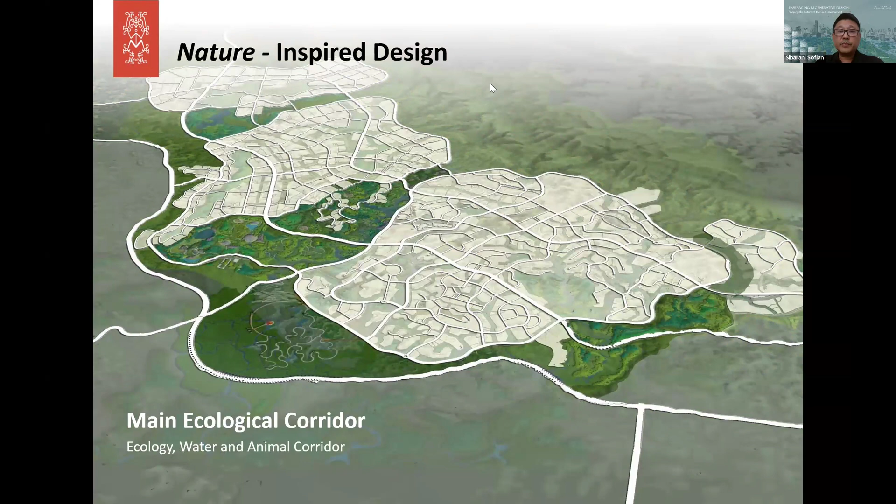We try to identify within that riparian area the intertwining between the urban system and the nature system, to be closely knit and networked, so that 70% of the green area is actually in the form of this natural state. We are not trying to move things around, we try to work with whatever is already on the ground.

This is the subject of reforestation and regeneration, because we understand the condition is already very disturbed. From the urban system point of view, we want to make sure that the diversity of land uses is there, to make sure we are vibrant enough, combining different uses so it minimizes travel.

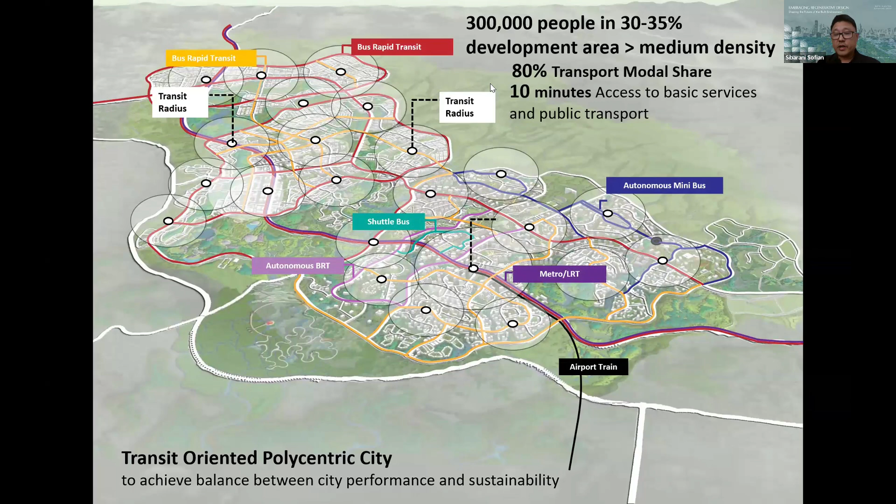We also start from the travel pattern first, putting in the backbone of the transportation. We try to build a walkable area around the mass transit, and build density around it, to make sure we have an efficient and polycentric system that allows people to move within a 10-minute radius. And bear in mind, it is not flat, so that 10 minutes becomes even smaller than normal.

The next section is how we try to see not only the building side or the urban form side, but also the negative of it, which is the ecological and landscape perspective, and how to bring back nature and wilderness in the city. So we have this situation where the one on top is how it used to be.

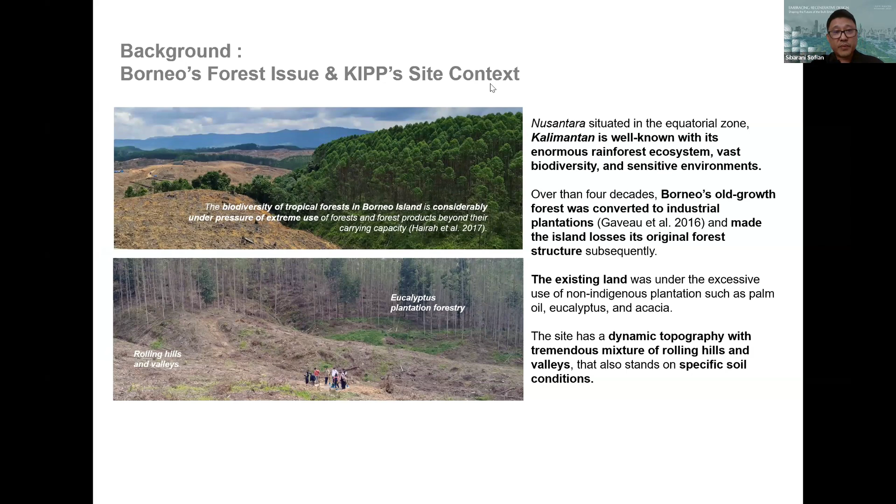It's already been destroyed and changed into a monoculture, and it happened really fast - 220,000 hectares of primary forest wiped out. So we really need to bring this back into the design framework and try to restore it.

We try to create a living system and distribute this open space across the urban fabric, reintroducing native vegetation and ecological conditions back into the area, while also introducing it into the urban context.

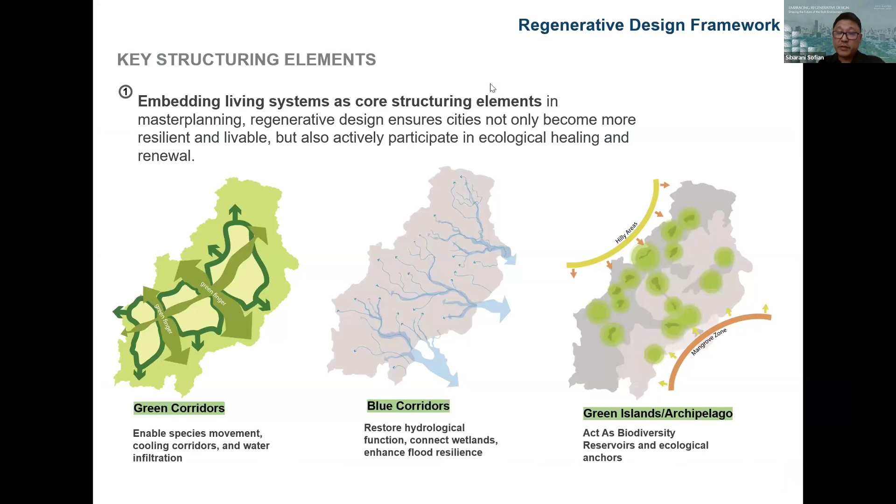So we try to develop the idea of the archipelago formed this way. All the urban area is actually islands of urbanity surrounded by green corridor, blue corridor, and we have islands of the archipelago of greenery around. That forms this type of shape and form.

In more detail, all this riparian area is actually the key of our greenery initiative that we try to distribute and layer across the urban fabric. We try to put in the specification and the performance we want to get from there, be it water performance, ecological performance, or social performance.

We want to make sure it's not only a passive space, but also part of the social space. We use that corridor as the narrative for the integration between man and nature, with a long journey of programs - 3 phases, the first 10 years - to replant and reintroduce the green layer.

And of course, it takes time. It takes the first year just to have a mix of the old species. This eucalyptus species is very brittle and very fragile.

So every 3 to 4 to 5 years, it will fall down by itself. So we really need to introduce the new layer, but it needs to coexist. It doesn't happen by wiping it out and replacing it with something completely new. So we layer it in the next 2 to 5 years and 6 to 10 years, with succession of new layers, and then we look at the 25 year program, all the way to the 50 year program, to bring back all the forests again to the natural state.

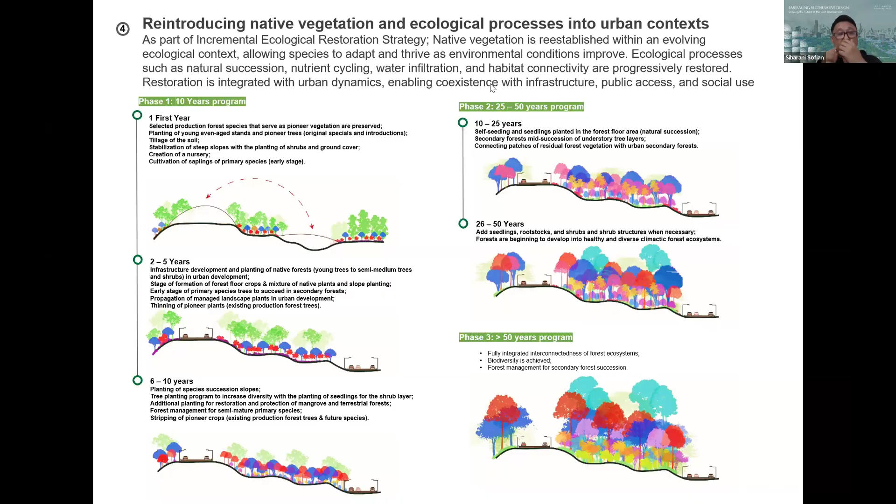So of course, this rendering is the nicer version of it. This may take 10, 20, even more, probably 30, 40 years to take shape.

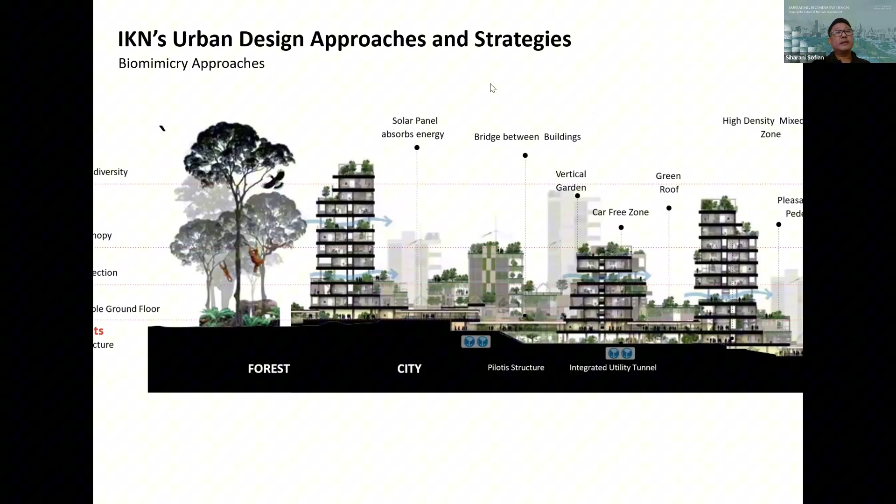So in more detail, what would be the solution at the smaller scale, meso scale, or micro scale of the building? We try to bring the idea of biomimicry and the biophilia approach, to mimic and emulate nature, and see how much the forest system can be implemented into our urban system - working with the contour and different terrain, interconnecting buildings just like branches, harvesting energy from the top using solar panels, bringing porosity at the ground and middle level, and diversity at the base of the ground so people can enjoy the space and interact with nature.

And this is nothing actually new in our vernacular architecture, where we also bring in a minimum, light touch approach to the land, to follow the contour and allow nature to coexist with the building.

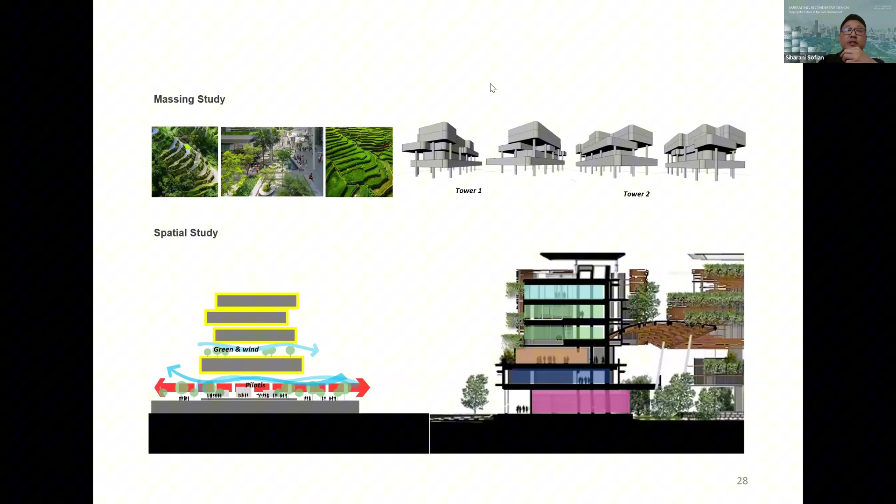In our old Banjar homes, or even in many places in Indonesia, we have rumah panggung, buildings that start on stilts. When we bring this philosophy into the built system, also inspired by Indonesia's nature system, we try to be adaptive to the contour. We don't work on one platform, but on multiple layers and multiple accesses.

We also try to connect buildings that are separated by contours at the ground level, so we level out the base of the pedestrian system to be more direct and connected. We bring a lot of program at the base to create interaction so people can walk, and we bring in the corridor of green to create microclimate, an ecological corridor, and a lot of possibility of integration with the building.

And the building itself has a lot of greenery. We also bring public transport to the blocks and buildings to make sure people can use public transport in a more efficient way.

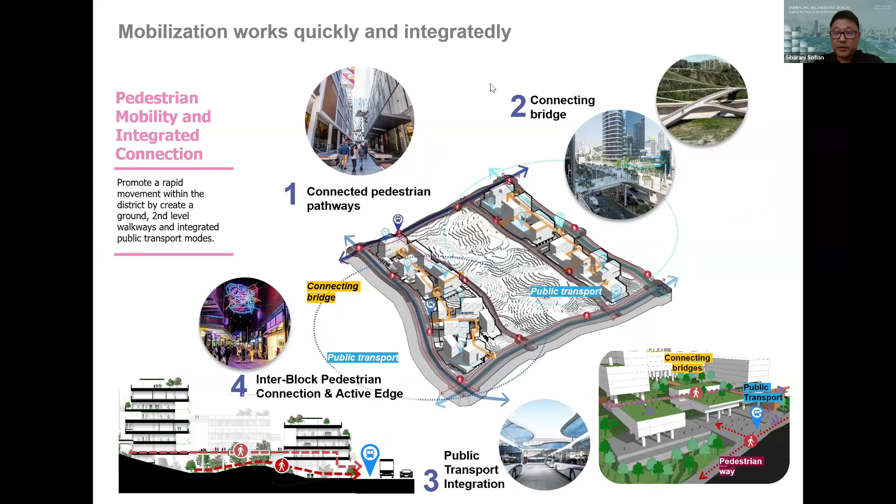And of course, the more technological and advanced system is also introduced to make sure we stay relevant with recent technology, using IoT and smart systems.

So some of that works out in our coordinating ministry blocks that are already being built now - it's almost completed.

So one of the big transitions is we open up the ground level and don't put any fence on the ministry building, which is not really happening a lot in Indonesia, especially in government buildings - they tend to be fenced, tend to have a lot of setbacks, with services happening on the upper floor. So in this system, we try to open up the ground floor to create more interaction.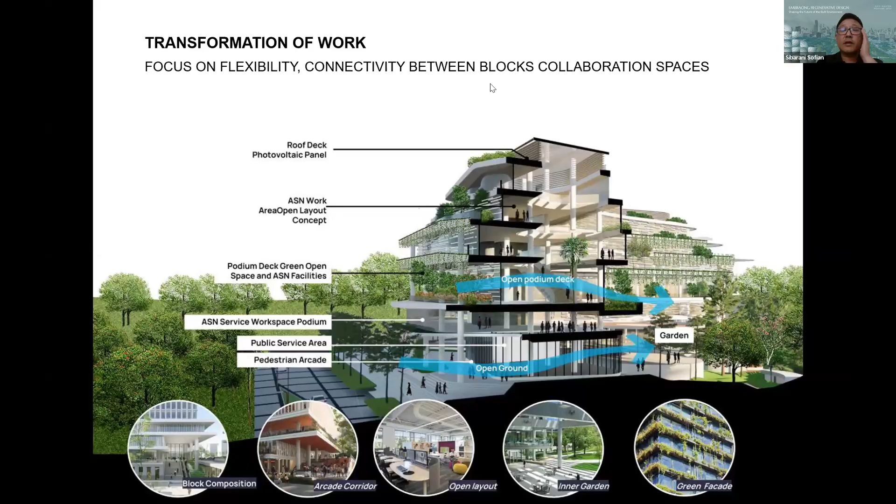We also open up the wind corridor to allow wind to penetrate. The green building also tries to hit a high target, and we do a lot of cantilevering to create shade and protect from the sun and heat, minimizing energy spending.

And we also try to do a lot of recycling to make sure water is kept. Some of the views you'll see are basically renderings of the principles we apply - how nature intertwines with our built system. It's already started taking shape, and it's relatively close to what we actually imagined.

And if you can see, the undulation is still there. A lot of greenery is happening in and out of the building, and the building itself tries to orient towards the most energy efficient position, and also towards the wind corridor, allowing that passive design to take place.

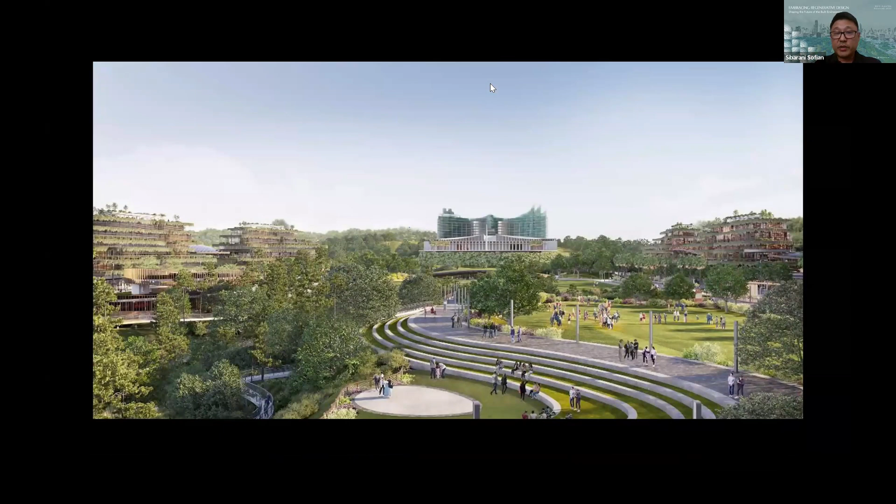So the building itself doesn't require a lot of the higher energy typically used in the most urban areas. You see some of that already, rendering is already starting to take place. Of course, the greenery is a bit harder to depict because greenery takes a lot of time to grow, but at least some of the existing trees are there that we keep and protect. We create the conditions for the next layer of forest to come in the coming years, and that creates also some kind of different aesthetics.

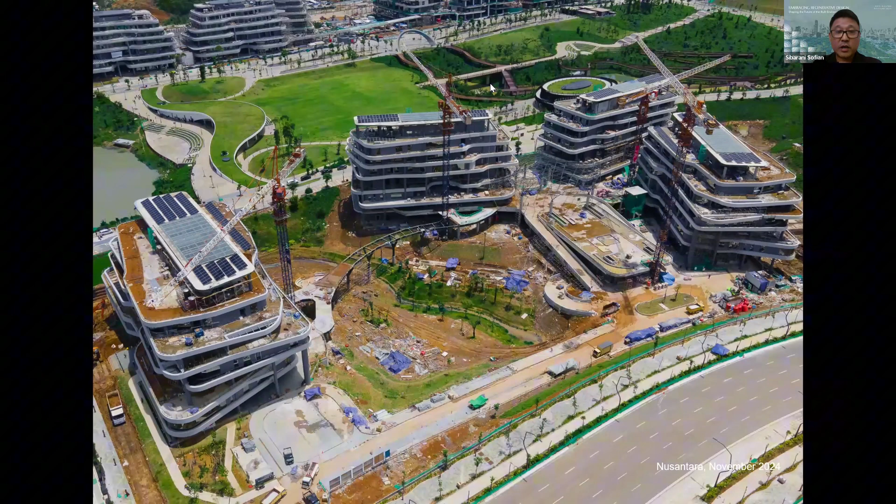This is our alun-alun, our sort of public space, and it's bringing nature closer to the public space. So people coming to the capital city can enjoy being close to nature, and the interconnectivity between the buildings is also starting to take place. Take note of the riparian area coming in between these two buildings, where water will be filling up, and the WSUD and green nature-based solutions are already starting to come in between the buildings. Okay, I think with that, I finish my presentation.

Back to you, Sean. It's very interesting. Do you understand that larger cities need to be organically grown and need to develop on their own behalf over time? You can't master plan the entire thing, but how do you think the city is going to grow organically and more naturally with residents arriving and according to residents' needs?

True. Yeah, I think in most cases of our city we cannot really implement this model. This model works with a more top-down approach with a lot of government funding. So I think what will be interesting is to see this as the most ideal case, to put it into perspective, but then how to put it within certain limits or parameters for a more natural and organic way to grow. One thing we can do, for example, is identify all our natural systems before we overlay it with full-on built development.

But then the economics of it needs to be taken care of, because equally the nature and the building require certain levels of maintenance, financing and operation. In our capital city, because it has such a big budget coming in, I think that's what speeds it up—whatever you see is within 3 to 4 years. That's not going to happen in a normal case. It will take some time, it will take certain resources. And what's important is understanding that we really need to bring nature into our urban system and consciously, religiously think about it before we just open it up for economic activity.

So what are we going to do about it? One of the things I've heard a lot is greening our cities. This I think is a fantastic thing, and we should do more and more of it. The engineering practice I run with my partner, Aaron Chadwick, we were the engineers for Gardens by the Bay, and this is all part of the greening the city process. They got this plan for this 50-hectare garden 40 years ago, and finally built it. It appeared in a Planet Earth documentary with David Attenborough, and you can listen to him talk about it.

Can you hear that, Nino? Singapore. 2 million trees have been planted here in the last 45 years. This city is now richer in species than any other in the world.

But perhaps the most spectacular example of city greening is this grove of super trees. Create the space and the animals will come. Is this a vision of our cities of the future? When it won World Building of the Year at the World Architecture Festival in 2012, it was an architectural award, but the jury chairman said he was awarding it to the structural engineer, environmental engineer, landscape architect, and architect. He said it was the most collaborative project he had ever seen.

This is a very important point about collaboration. We at Atelier One are structural engineers, but we're 8 billion people on this planet. Nina, you said we need to think about food. Food is a major issue on this planet, and it's going to get worse. John Hardy, who I'll introduce and talk about bamboo with in a bit, said: if you own land and you don't grow food, you're not part of the future.

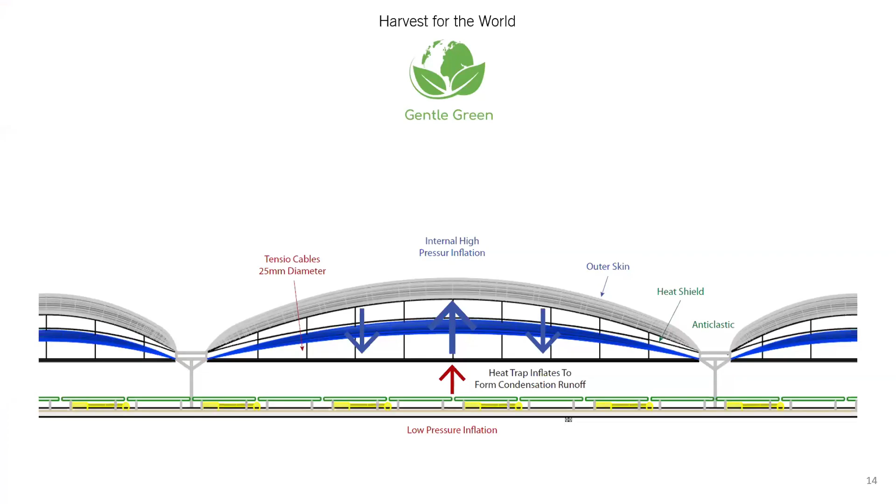We've developed a whole series of buildings at Atelier One. This is a project we did with Cambridge University to develop a 160-meter tower. You need to think about materials the way you use them in a different way, because materials have different properties. A timber structure looks very different to a structure of concrete or steel.

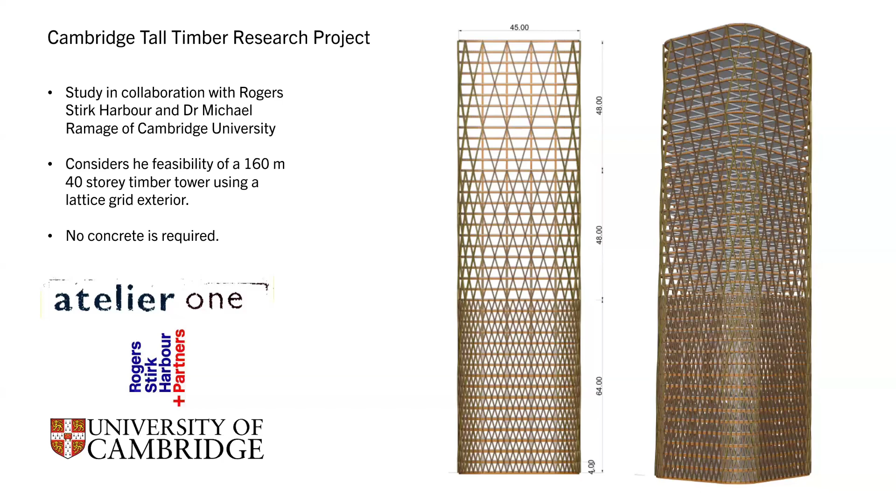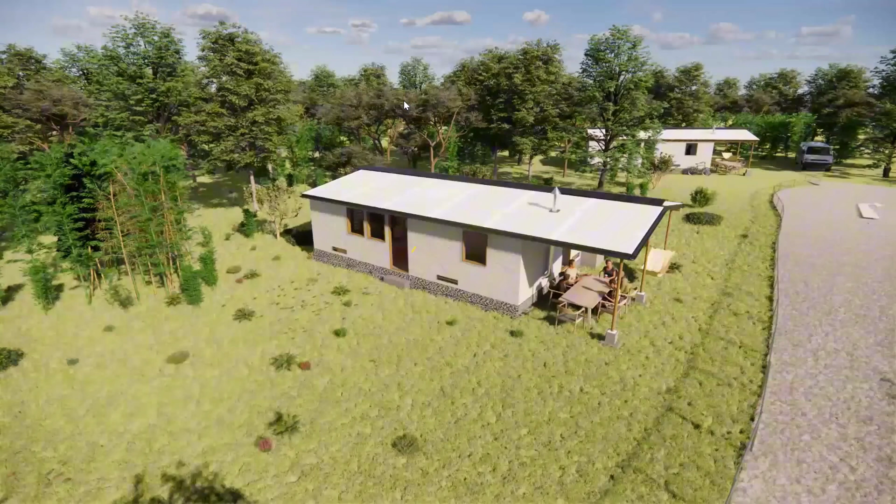So what other things are we doing with bamboo? We're working on a humanitarian housing system with a group. We're part owners in a company that built 21 houses in Nicaragua, you can see behind there, bamboo frame. This is the new version, which we're currently meeting with Hilti on Monday about a contract to build a whole series of them in Mexico. This particular one's developed for Mexico, but what we've learned since the first versions in Nicaragua, we've been able to develop this kind of modular system, you can see here these panels, they're all modular.

Looks beautiful. We've applied a whole series of environmental ideas to this. For instance, in Nicaragua the roofs were painted green, but a white painted roof will absorb less heat and light. By putting a ventilation ridge down the middle painted black, we pull in a thermosiphon to pull air through, and it didn't cost anything but the cost of the paint. There's also a wonderful book about training vegetation and walls to push air around in a particular way, a German, Georg Lippsmeier, did a book called Tropenbau, or Building in the Tropics, an amazing book about working there.

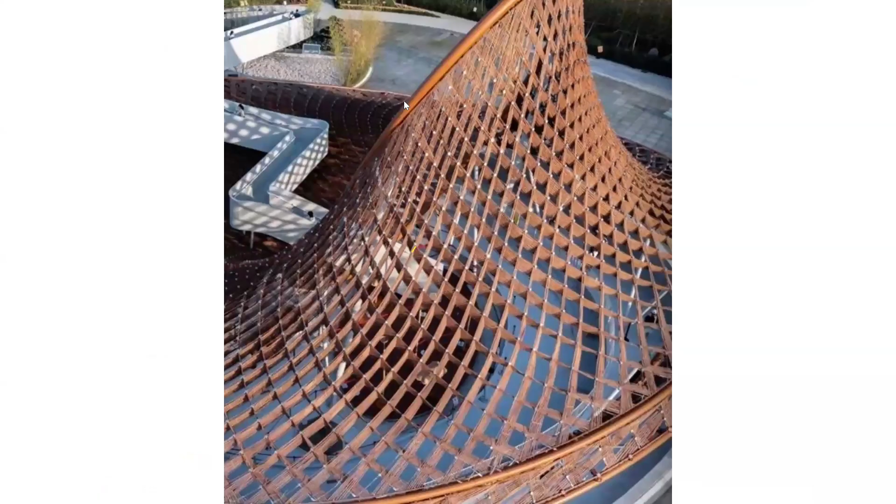Neil, can you just go back? Yes, the ventilation ridge at the top, painted black, absorbs heat from the sun, creating a thermosiphon, drawing in air from below. Incredible. And this is very low cost, anyone could apply this, any villa, any house, it's just remarkable. And the well-being this increases, the actual enjoyment of being in that space with that airflow. It's so simple, why is no one doing this? It just blows my mind.

But the real thing where bamboo really takes off in the Western industrial construction industry is engineered bamboo.

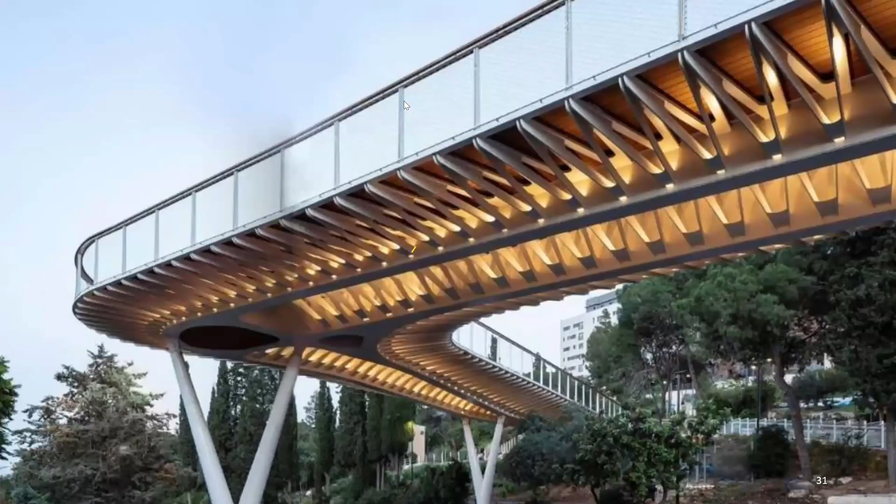This is a company in China called Grizu. They take bamboo, break it down, and form laminated sections, building structures like the one I showed, bridges. This is designed and built by Professor Xiao, who I met last week in Brisbane, Australia. He has built a 7-story building that is purely and only engineered bamboo.

So beautiful. Bamboo is across the tropics. It covers 1/3 of the planet's surface, and there are 1,500 species of it, and it is everywhere. It sequesters carbon, grows very quickly, reaches full size in a year, and matures in 3 or 4 years, compared to timber, which takes 30, 40, 50 years.

We are currently discussing with our government in the UK the use of bamboo here, and I was out in Australia promoting the idea of the government there using it in Australia.

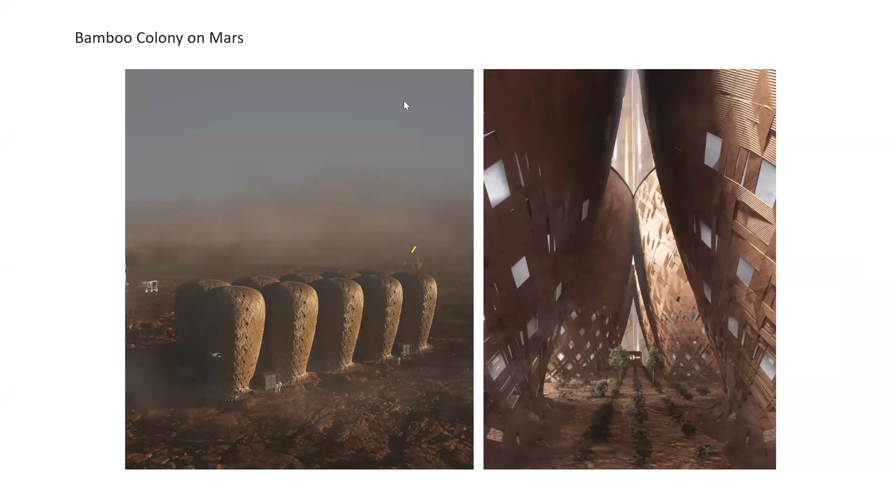This is a bamboo proposal for a colony on Mars, built in bamboo fabric. We take the bamboo fibers out, and you can knit and weave it into surfaces. If you're traveling to Mars to build a base, you don't want to be carrying heavy construction elements, so you carry this woven net, take the earth from the ground, and create this enclosure. That's the kind of possibility.

Bamboo, I think, is a way forward, because of the natural materials themselves, but engineered bamboo specifically.

I mentioned the point of collaboration. Meeting the needs of the present without compromising the ability of future generations to meet their own needs was the title of the talk. This is the United Nations' explanation of the phrase sustainable development, but it also says the survival of our societies and our shared planet depends on a more sustainable world.

I mentioned collaboration. I hear more and more people saying, well, what can I do? It's just me, I am just one person. But you'll find 8 billion people are saying that.

Thank you very much. Thank you, Neil.